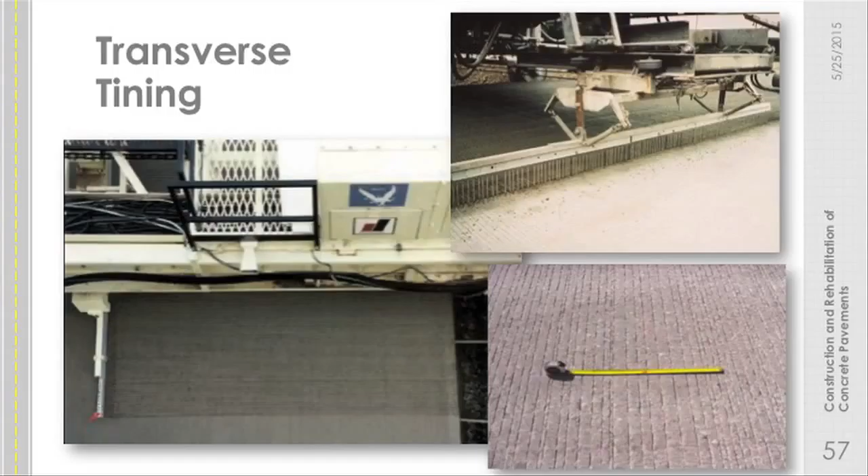Another weird thing is that when you do transverse tining, vehicles can start to lose control, especially light vehicles like motorcycles. Since the tines run in that direction, vehicles start to go sideways, and the tines promote them to spin around.

If the tining is in the direction of traffic and you start to spin, it grabs you and pulls you back forward. So it's taken us a while to get to this point. Longitudinal tines are the standard now, pretty much in the US. They also happen to be significantly quieter than transverse tines. Transverse tining is about the loudest texture you can build into a roadway, so if you're using transverse tining, consider using something else.

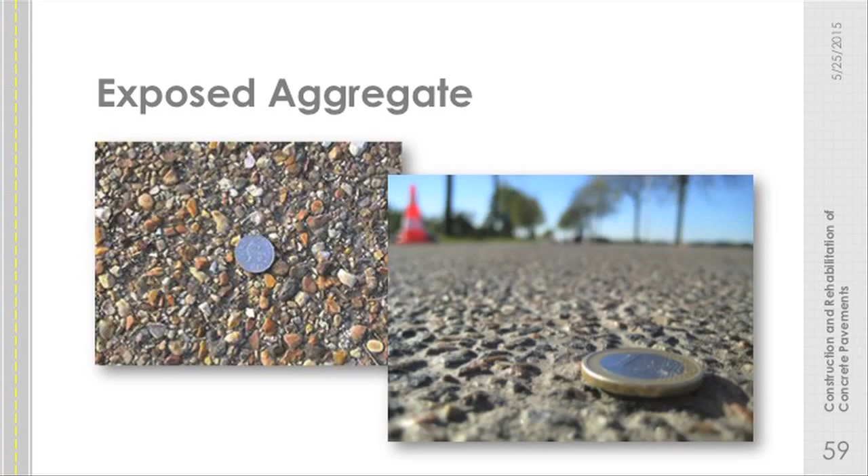Exposed aggregate, we've done this some in the US. That's a euro, that looks like a Czech crown, so these are European photos. We don't do it that much in the US. It's costly. You have to have a good handle on the aggregate gradation. As soon as they place the concrete, you have to spray the surface with a retarding agent to slow down hydration just at the surface. Then at the right time, you go back with brooms to mechanically remove that paste. If you go too late, you don't get as exposed a surface; if you go too early, you start to pull up the rocks. So it's very much an art. They do it mostly for noise reduction, though in the UK they'll do it for friction as well.

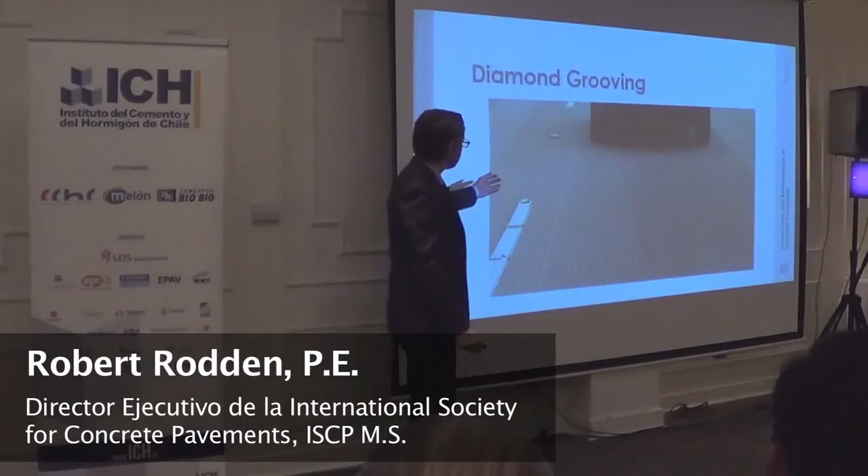So finally, onto the most aggressive surfaces we can build. Diamond grooving - we don't do anything to the surface itself, we just cut into it at regular spacing with diamond blade saws. This one's in the longitudinal direction. Concrete airfields - it's not uncommon to see diamond grooving on airfields.

Last thing, probably the most aggressive texture, is diamond grinding. We do this a lot in the US, especially on the preservation and maintenance side of things. This is comparable to refinishing a hardwood floor - we're covering up or removing the entire surface defects. So if you had a little bit of faulting from slab to slab, it would zero that out and make the pavement perfectly smooth.

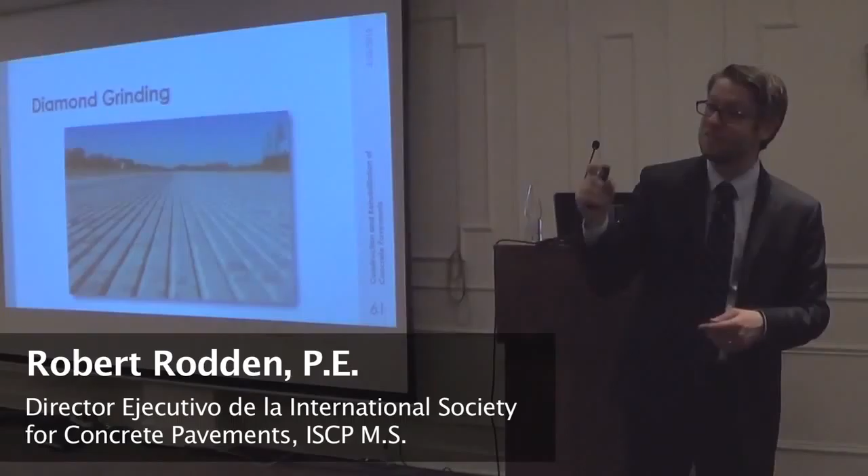Now, because we're finishing the entire surface, it's relatively costly compared to other methods, but it gives us an opportunity to extend the life of the pavement. In states like Washington and Utah, they're now taking this approach because they have a lot of studded tires in the mountains - whenever it snows and there's ice, people put on tires with little metal studs for traction, and those tires rut concrete. It doesn't matter, concrete will rut just like asphalt. So from a management perspective, if they need 20 centimeters of thickness, they'll build it a little bit thicker than that - building in sacrificial thickness to allow diamond grinding once rutting has occurred. Once they get more than 10 millimeters of rutting, they diamond grind the entire surface, having built in that extra thickness as part of the preservation plan. That little bit of additional cost up front saves them from having to reconstruct the pavement.

All right, I've got two videos of US practice.

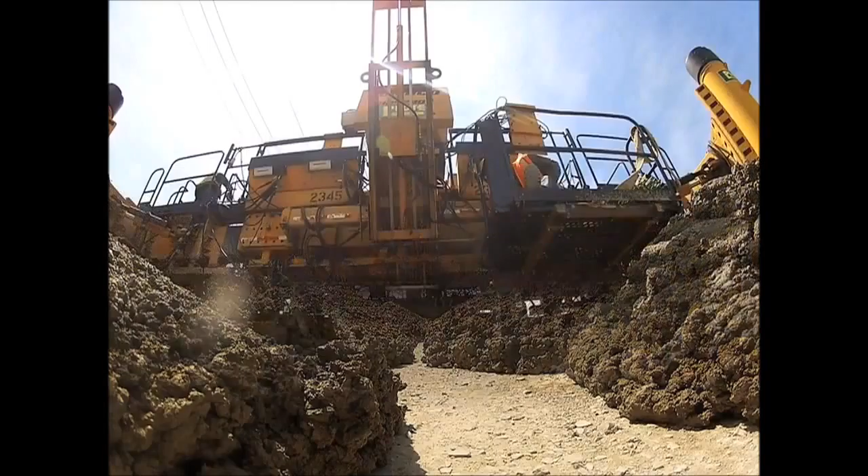That goes out behind the pan, engages the tie bar, and punches it in at the right moment. If you're close enough, and you've never been around a slip-form paver before, you can feel how this concrete, all by these vibrators alone, is just getting pulled into being flat. Right through here you don't see this rough aggregate texture at all—it's becoming temporarily fluidized inside, constantly rolling that head of liquid concrete forward.

They did this with GoPro cameras so they could lose them. Past that point, they had the texturing, curing, and other operations. You see our string line guiding the pavers, and all those pieces of equipment mentioned. Next video is a little longer with the paving action. That was Dottie Avenue in Chicago.

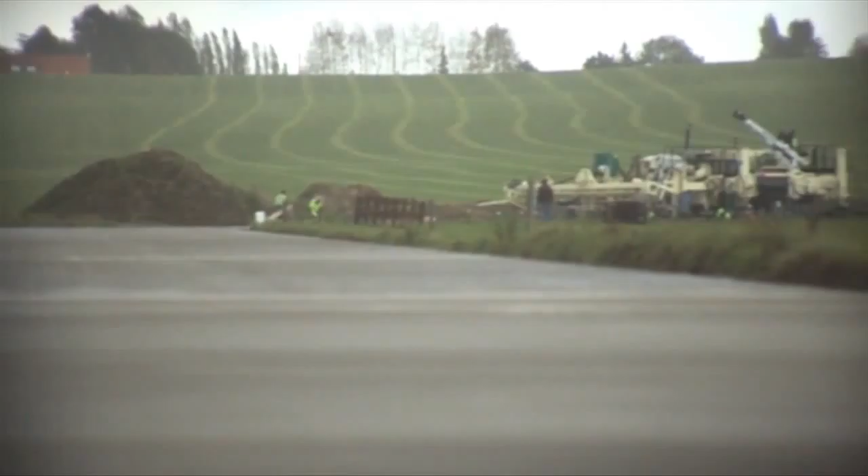This video is from Guntert and Zimmerman. Primary slip-form paving manufacturers are Guntert and Zimmerman, Gomaco, and Power Pavers, I believe—and Wirtgen as well, out of Germany. So there's four primaries. This is their mid-size paver, probably one of the more popular pieces of equipment they have. I think this one actually has a dowel bar inserter in the video.

These are just from YouTube, just grab them off of there. We've got our string line making a curve there. This piece of equipment is outfitted with a plow instead of an auger, so we'll see that in action. They're dumping it pretty close to where the plow will be, using ready-mix trucks, even though it looks like this project's pretty far in the middle of nowhere. There's one perspective of the plow.

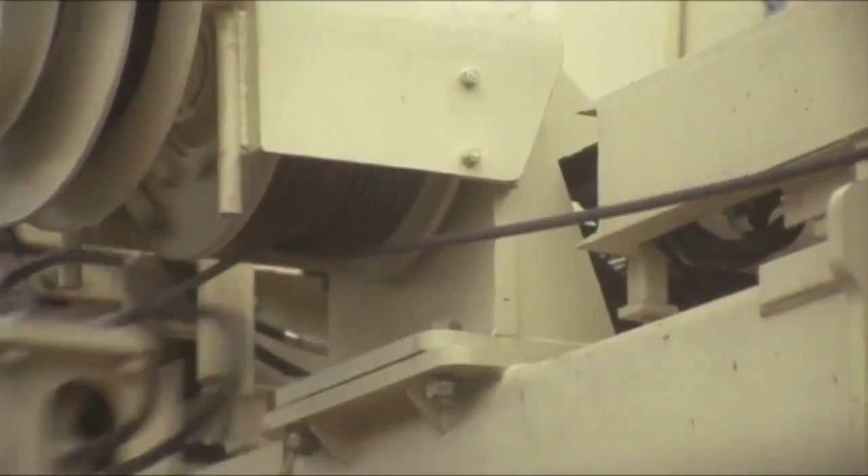Once they get moving, that'll push the concrete back and forth and into the corners. There's our operator up front telling the plow to go back and forth, checking on the supply of things. Looks like here they're just getting off the header. So even out front you can see there's a bit of a pitch to those pans. That's the drive system for the plow itself.

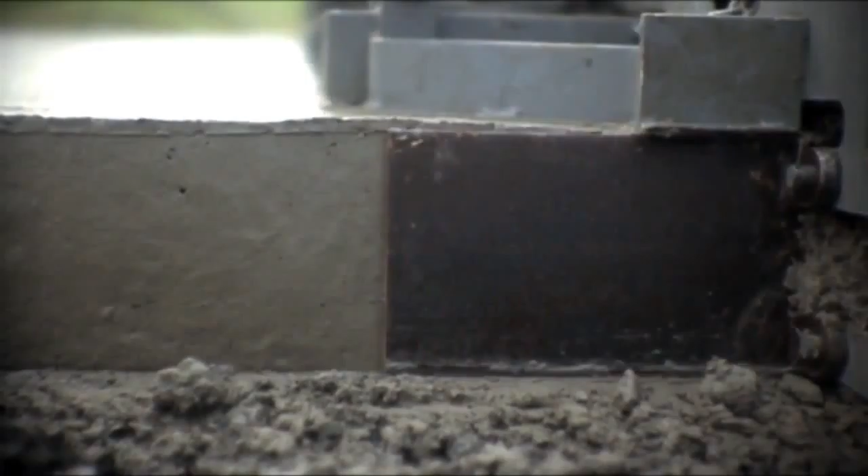So they're getting a pretty constant level of that concrete across the width. You won't see that same impact of fluidization that we saw in the last video, because things are already relatively flat. But there, inside of the side forms, the concrete is bubbling—we're losing air because we're fluidizing with the vibrators, about 2% loss of air inside of the paver. This device right there, that wheel, was timing the tie bar inserter. There you can see the edge slump happening in real time.

So imagine trying to pave up next to that. You have to match elevation, you want that thickness—lots of little moving parts. But what you don't see in the slip-forming action is a lot of labor. In places like the US, where labor is very expensive, it's more cost effective to go into some of these slip-form approaches. Now when we talk about international practices, we'll see some more photos of the impact of labor in fixed-form versus even precast concrete paving.

So we placed the concrete, it's all consolidated, all these things—now we're on to curing it. When it comes to curing, we're trying to maintain both the moisture content and the temperature of the concrete. Depending on if it's hot or cold outside, that means different things. But ultimately, the hydration reaction—cement plus water turning into concrete—needs moisture to happen. It needs that water. So if we lose a bunch of water, hydration will stop.

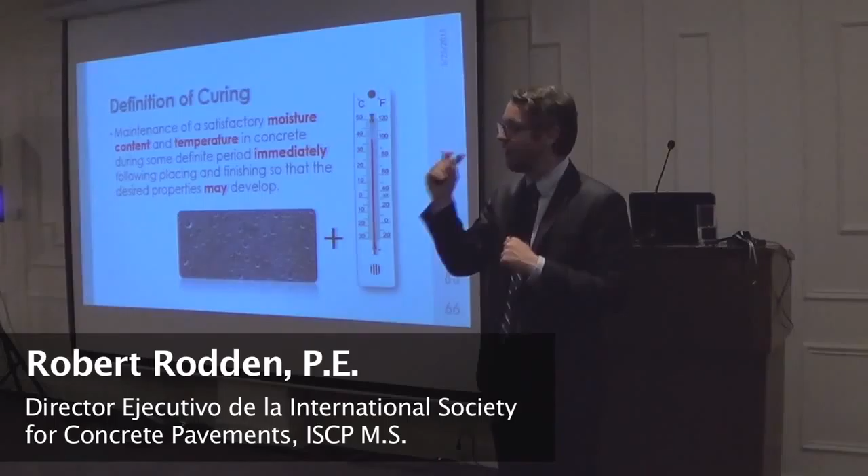If it dries out at the surface—again, the most critical spot in that thickness, that's what's exposed to traffic, that's what's exposed to any sort of salting and freeze-thaw—if it dries out at that surface, hydration will stop and we'll stop gaining strength right at the surface. So we want to make sure we either keep a constant supply of water at the surface or prevent the moisture from evaporating, which is more of what we do in pavements.

The other side is temperature. If it's cold out, we want to make sure we keep it warm enough so that the concrete hydrates as we intend. In extreme cases, if you place fresh concrete in the field and it gets very cold overnight, the water might actually freeze before the concrete sets. That free water that hasn't yet hydrated with the cement can freeze, turn into ice crystals, and your concrete strength is essentially zero. You have to remove and replace it in most instances that are that bad.

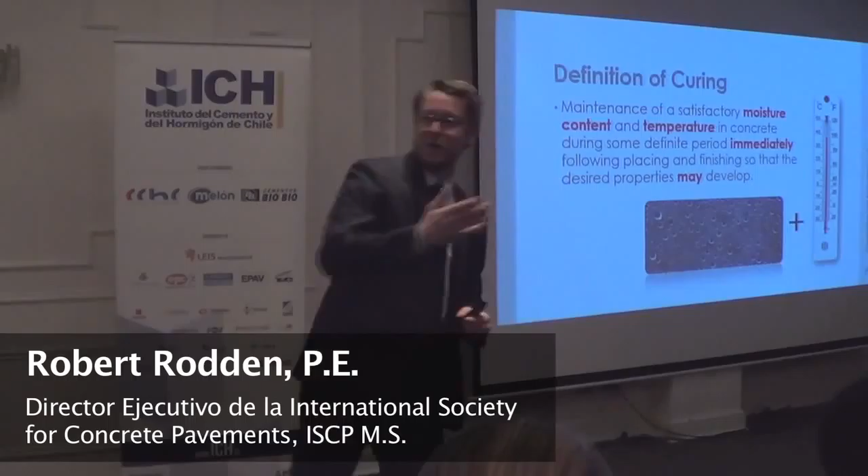Now, anywhere along that spectrum, if the heat isn't where it needs to be, the hydration reaction will slow down, so the strength gain won't be as quick as you'd like. You won't be able to open it to traffic as quick as you might like. If it gets too hot—I wish I had a dry erase board—there's problems that happen on the other end, but they're more difficult to describe without drawing. Too hot is a problem as well.

Curing objectives: we're trying to prevent or replenish the loss of moisture and maintain a favorable temperature, one that's conducive to proper strength gain. We're doing this for a predefined period of time. As a contractor, the owner can't expect me to cure this concrete slab for a year. It needs to get open to traffic, usually very quickly. So we have a certain amount of time that we're most concerned with.

What we see in these photos are the two most common curing methods in the US. The first is an application of a white pigmented curing compound from a texture cure machine, so it's a very automated method. Our Federal Highway Administration's guidance is that the surface, if you're using white pigmented materials, should be as white as a sheet of paper.

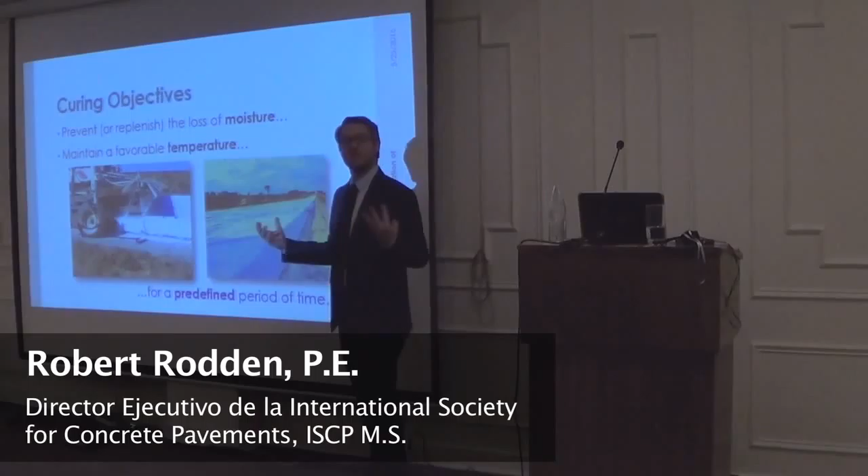Over here we have blankets, which are just like a blanket that you sleep under. It's holding in the heat of hydration to help maintain a favorable temperature. We do that if it's cold out.

So we do have different methods, that's two of them, and we break them into initial cure and final cure as well. An initial cure is something that we might do during the point before bleed water has escaped completely, before we can apply the curing compound or other methods.

Now, when we place the concrete, there is some water that will bleed to the surface. We'll get a nice sheen at the surface, which will evaporate off. Before that's completed, we cannot apply a membrane-forming curing compound. Otherwise, the bleed water will mix with it, and it just goes away.

It's not effective. So before we are at the point of bleed water happening, we can use evaporation retarders on the surface. We just spray those on the surface, or use misting or fogging. We're not adding water to the system, we're replenishing the water that's evaporating out to try to prevent plastic shrinkage cracking.

Once we get past that point, the final cure, we can use wet coverings. That might be paper or burlap that we continuously keep wet. We're trying to moist cure. We can use impervious paper to try to seal in the system, or plastic sheets for the same reason.

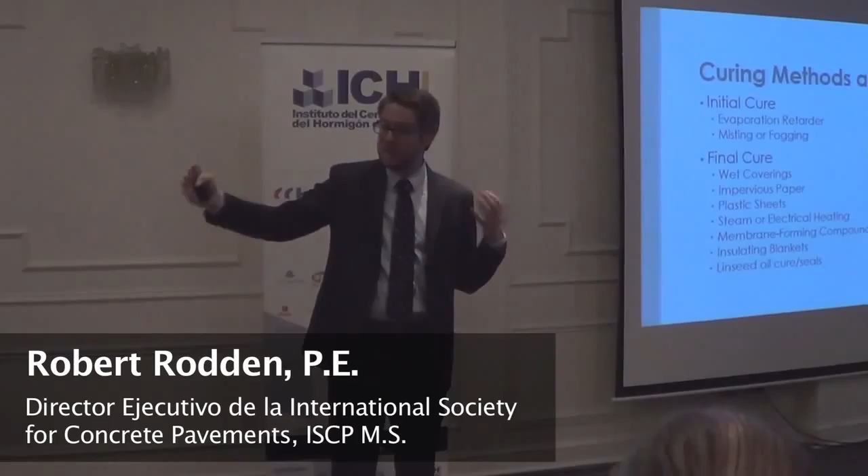We can even go so far as using steam or electrical heating, adding a bunch of heat to the system, and we'll do that in extreme climates like Minnesota and Wisconsin. We actually have massive heated blankets that we roll out onto the grade, and it heats up the soils or the subbase. We place the concrete, and we roll that same blanket right on top of the concrete to help add heat to the system. That's the only way we have enough time to build concrete pavements in such cold climates. It's by extending it with our curing.

Membrane-forming curing compounds, like this white pigmented one, just try to seal the surface. Insulating blankets and linseed oils, which are more commonly seen as sealants, fill the voids of the concrete to help resist freeze-thaw issues. Most common are the membrane forming and the blanket cures.

Is that true here as well? You're transitioning to the resin-based, correct? And less of the water-based? That's only our harshest climate state agencies are really pushing for the resin.

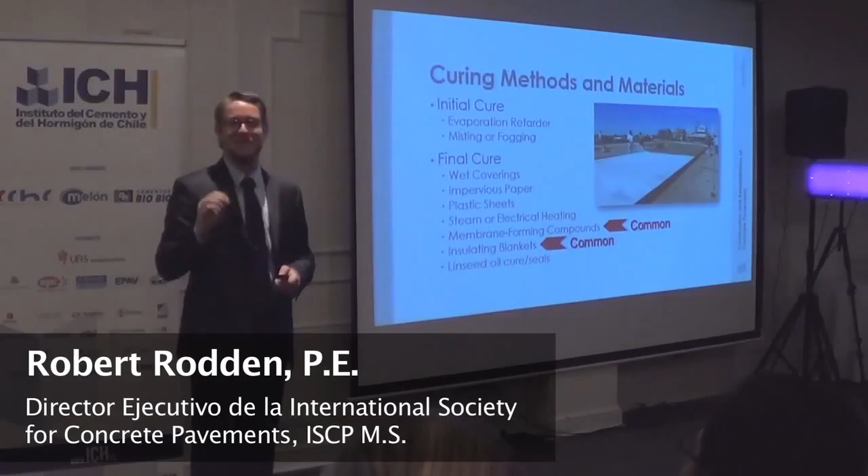In fact, Jeff Roesler has done some preliminary research at the University of Illinois, and he now suggests that if we cure too well with the resin-based, we might increase curl. Because what we do is we create too fine of a pore structure, which means for the same drying of the environment, we cause more shrinkage potential right at the surface. So where curing has been the best deal for 100 years, further sealing the system might actually have a negative consequence.

So keep an eye out for that if you see it with the resin-based here. We're watching all the resin states right now to see if there's any proof of that in the field. But that's based on research with specimens that are this big inside of a controlled lab chamber, and you can only get so close to reality with that sort of approach.

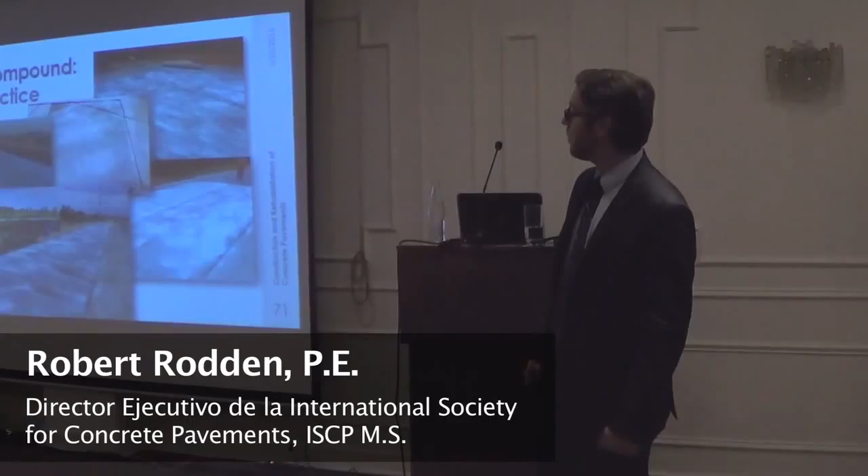This is a texture cure machine application. You can see, and this was in Texas, they just have trails from where they tried to cure. A lot of things could cause that. Maybe the equipment wasn't clean, the nozzles weren't clean. It could have been the consistency of the material at that temperature. It could have just been they didn't have the nozzles open enough.

It's hard to say, but we've had some practical research come out of Texas on the curing application side of things, because it's very difficult, based on the manufacturer's recommendations, which specify a certain area of application per a certain volume of material, to try to enforce that in the field.

So the Texas DOT first developed what they call the diaper test, where I don't know if you have these here or not, whenever you're training a puppy, a small dog, to go outside, you put these sheets out and the dog pees on those, so just absorbent sheets. We'd place those in the field, run the cure across it, and measure how much material was absorbed over that area.

So we could check the application rate. The easier thing seems to be, if you're using a texture cure machine, to validate each piece of equipment as the owner independently. That's the automated method, not a hand sprayer, but the texture cure machine, such as this.

What you can do is, on each nozzle, just hang a bucket. You can have them move forward at the rate that they would normally move forward with the nozzle spraying, and measure how much curing compound is in each bucket. Based on the amount in each bucket, look at the handle that controls the forward speed and put a mark that they can't go past, because if they go any faster than that point, the application rate will be too low. So it's a very practical, hands-on way to say, well, we're going to validate your machine, your piece of equipment.

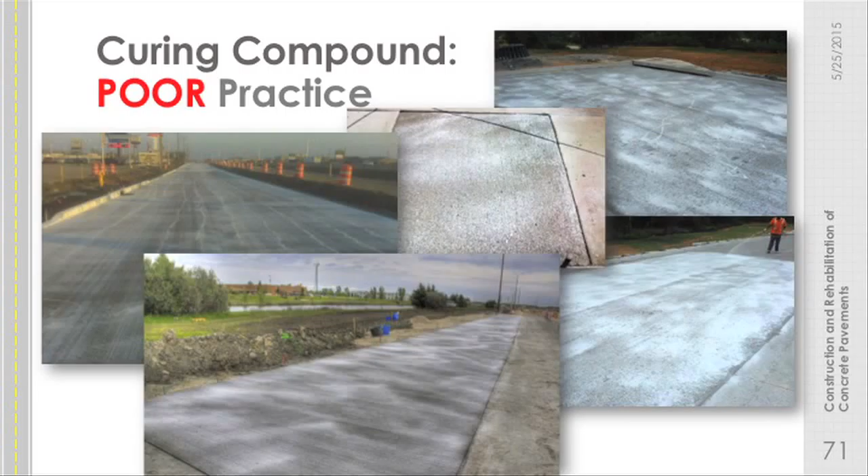The only other caveat from my time in the world of contracting is be happy that you're into the world of resin cures, because with water-based cure, it was very common for contractors to just add a little bit of water into the barrel of curing compound to help extend how much is left, because it would just mix in. You can't do that with resin-based materials, so there's no way to cheat the system.

Blanket insulation, we place this after we've sealed the surface with a membrane-forming curing compound. It reduces the loss of heat of hydration. It also lessens some of the other effects, like the air temperature and any sort of evaporative cooling that would happen from wind and solar radiation, so the sun's heat.

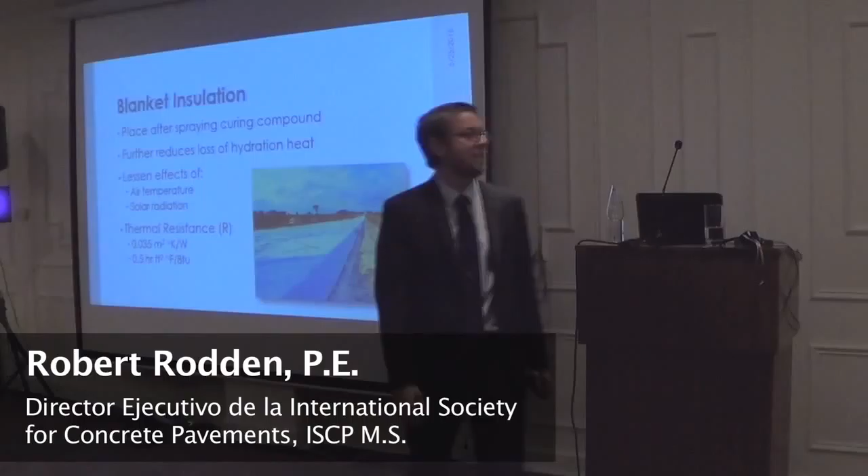So we might actually insulate sometimes if the sun is too hot. Typical thermal resistance, R values, are down there.

Now, when do we use these? A simple table based on the ambient air temperature and the opening time to traffic tells us when we might consider using blanket curing. So more often than not, it's for early opening to traffic than anything else. We're trying to get the hydration to happen in the window of time that we're most looking for.

Now, of course, you can change the cement content. You can change other factors to promote higher release strength. This is just one consideration.

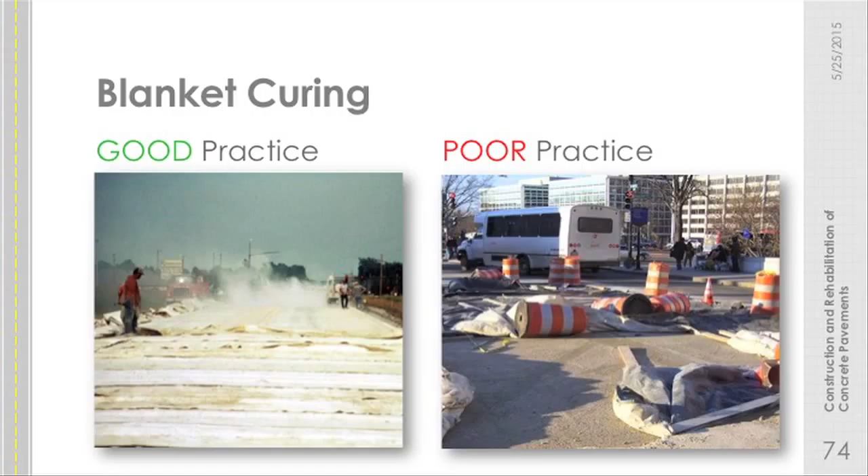Good practice here on the left. They were blanket curing long enough to peel them back in time to saw cut the joints. This photo on the right, I took in Washington, D.C. in January of all times, which is one of the worst times in Washington, D.C. to be constructing concrete pavements. They were rebuilding an intersection a quadrant at a time. I watched them place the first two. They worked okay. In this particular case, the curing just came off almost immediately.

Jointing. So we've built the concrete, textured it, cured it. It's time to saw cut the joints where we want them. If we have embedded steel, we've somehow communicated to the saw cutting crews where to place the saw cuts. Here, that gentleman is dragging a piece of chain or rope across the surface, doing that at a regular spacing to help indicate where to saw.

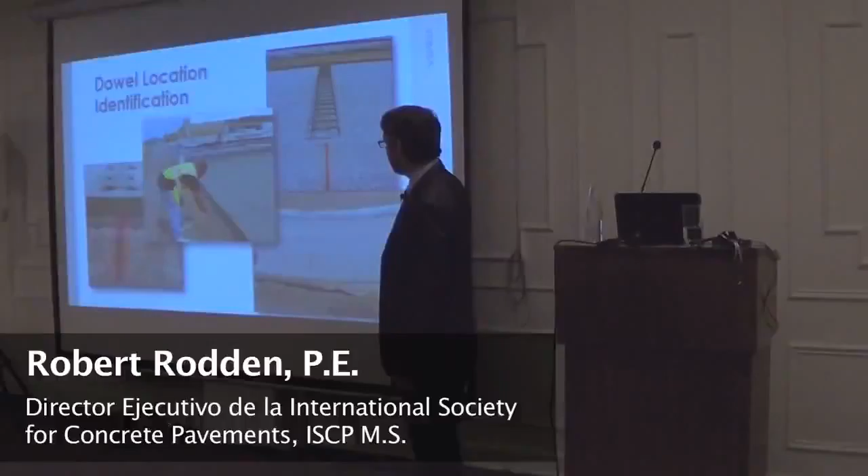We do sometimes see formed joints like we see in the top right here. It's not too common anymore, more common in developing countries it seems. The problem is whenever you have a perfectly flat piece of concrete and you somehow induce a void, the material has to go somewhere. It's just like inserting the tie bar into the side and making a hump. You push down and create a void, you end up with a little tiny hump on either side, which makes roughness. So it's much better to wait till the concrete sets and then saw negatively down into it.

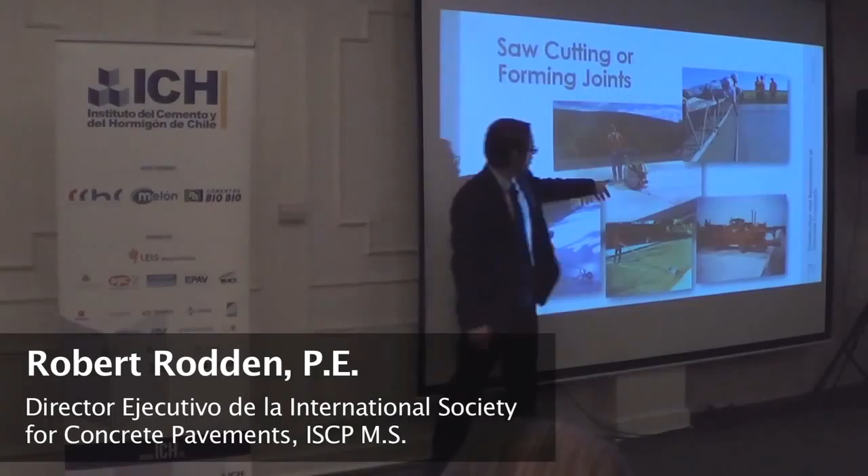Sometimes we have massive devices like this that follow the paving, right on top of the pavement, called a span saw. We'll do the entire width of the pavement all in one pass in a very automated fashion. Otherwise, more common, we'll see early entry saws, whether dry or wet. There's a soft cut saw, or a conventional wet cut which is quite a bit larger, and we saw cut those much later than the early entry saws. I see we have a distributor of some of these technologies over there.

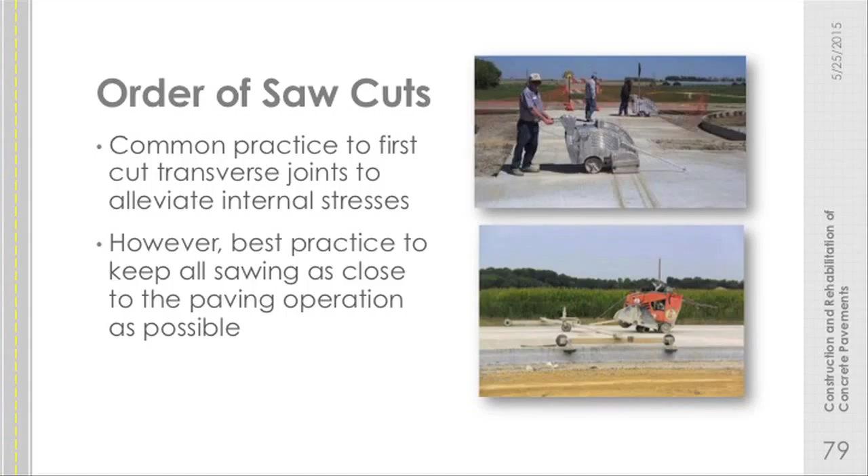Order of saw cutting: cut the transverse joints first. When we build this very long, continuous stretch of roadway, it's most restrained in that direction. It can kind of shrink and contract across its width relative to its length, so we need to prevent cracking in the long direction first. So we saw cut across the width first, the transverse cuts. It's best though to keep the saw cutting operations as close as possible to each other, so that's the transverse and the longitudinal.

When it comes to high volume road production, it's very common to see a jig like this. It just references the outside edges of the pavement. It has casters or rollers, and even as we move into turns or anything else, it maintains that saw right at the middle of that width. We can gang mount those, so we can mount two, three, four saws on one of these types of jigs. We'll see that when we talk about overlays.

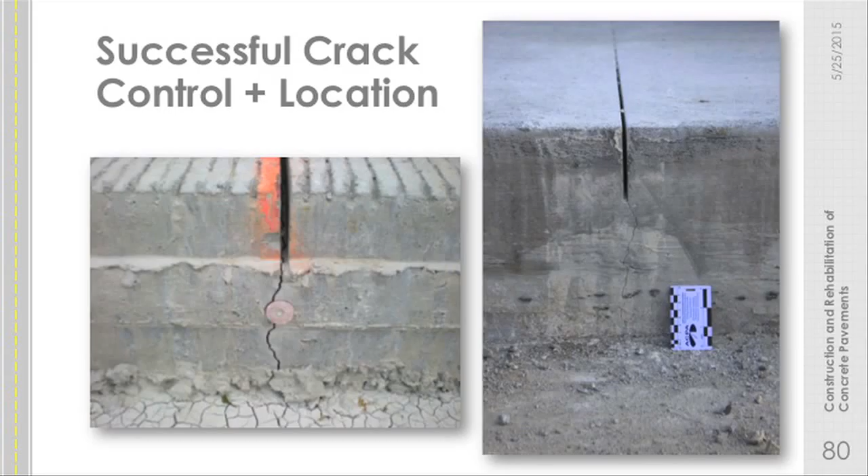If everything went well, here they have a point where they've indicated this is where I want you to saw cut, this is where I place the dowel bar. We can see our transverse tine. They've saw cut down to the required depth, and the joint is activated. That's what we're looking for. The joint on the right's a little bit finer of a crack, but it's there.

Now, the depth of the saw cut is as important as its timing. If we cut too shallow, we might not create a weak enough plane, so the concrete might not be able to crack at that point. If we cut too deep, we end up getting rid of the aggregate interlock, and that's especially important if you're not relying on dowel bars. So you don't want to go too shallow or too deep. If you go too deep, you also wear out the equipment a lot faster.

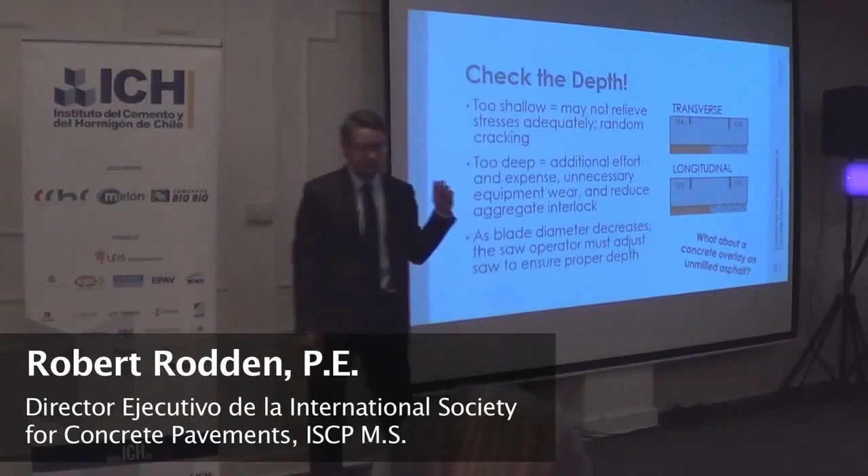Part of the challenge is, especially with the abrasive saw blades instead of the diamond-tipped ones, as you saw more and more, the diameter of the blade will start to decrease. If you've ever used a Dremel, a handheld Dremel with the cutoff blade, same thing happens with these. So the diameter decreases, so they have to cut just a little bit deeper to get the same depth of saw cut. And that's part of the art of the saw cut operator to handle all of that.

Transverse joints, if you're building on an unstabilized material, you usually cut to one quarter of the depth. Longitudinal joints, if you're building on an unstabilized material, usually cut to one third of the depth.

If you're building on stabilized materials, so a lean concrete or cement-treated base, you'd cut both to 1/3 of the depth. There's more friction, more restraint, and just to make sure we create that weakened plane, we cut a little bit deeper.

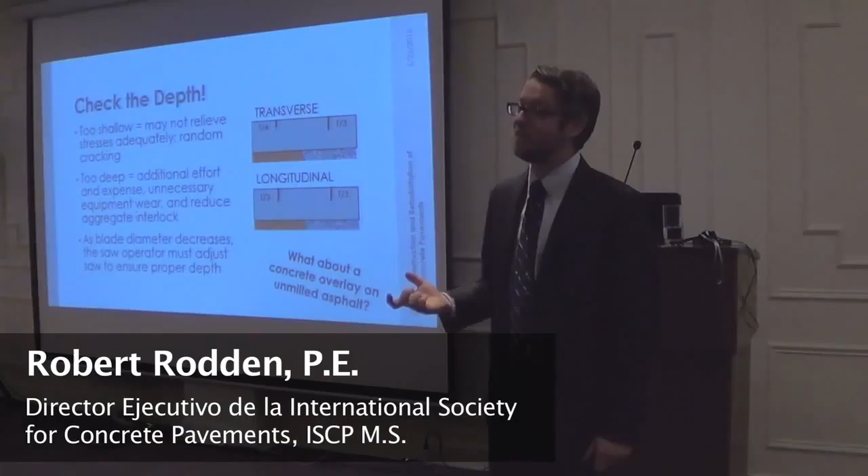The challenge is that we're looking for, say, a minimum of 15 centimeters of thickness, so that's the minimum. Where we have the rut, if the rut's an extra 25 millimeters, well, then the slab is 175 millimeters at that point, which means to maintain the same saw cut depth, we have to actually cut a little bit deeper. We do that with our overlay operations.

The saw cut operators will dip the blade down just a little bit deeper right where the ruts are. That's all part of the understanding of the contractor on the detailings of that particular construction and the inspectors to make sure that it happens. But we do that and it does work.

Yes, I have a question. Do we have the handheld mic? Does that one work? I got to turn it up. As we're getting the mic, or do you want to ask it in English and I can repeat it?

You're talking about depth, depend on early entry or not? Oh yes, I don't know if I have a slide on that or not. So he's asking if the saw cut depth is in any way related to the use of early entry sawing or not. Short answer is yes. Should have just asked you since I know you speak English. We'll get to that in the next slide.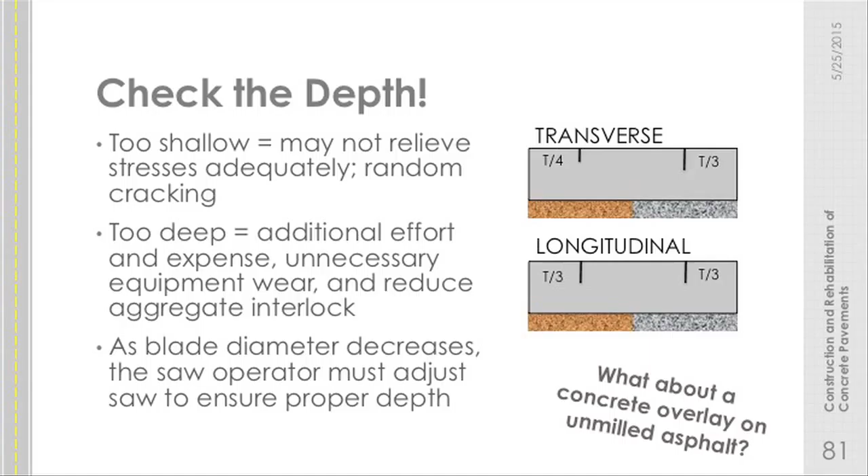So there is a minimum saw cutting depth. The short response is that the mechanics change when you're cutting so early into the life of the pavement. So it's not as simple as this is what we know works from 100 years of experience, and we introduce a new technology that cuts at a different time. We can actually saw cut a little bit more shallow because we're so early in the life of the pavement that the mechanics are different with crack initiation and propagation.

¿Y cuánto menos el espesor? How much less is the cut? Early entry saws, well, I guess I don't have that. Generally we're talking metric. That's the third thing that the US school system does not teach very well is metric units.

It's about 30, 35 millimeters minimum. Does that sound about right? For early entry, 25 minimum? Yes, yeah, I know that. But it's about 1.25 inches, 1.5 inches typically that we're at for, depends on the specification, for the minimum. So 33 minimum, does that sound about right? I guess we have the manufacturers over here, we could ask them during the break. But yes, there is a difference.

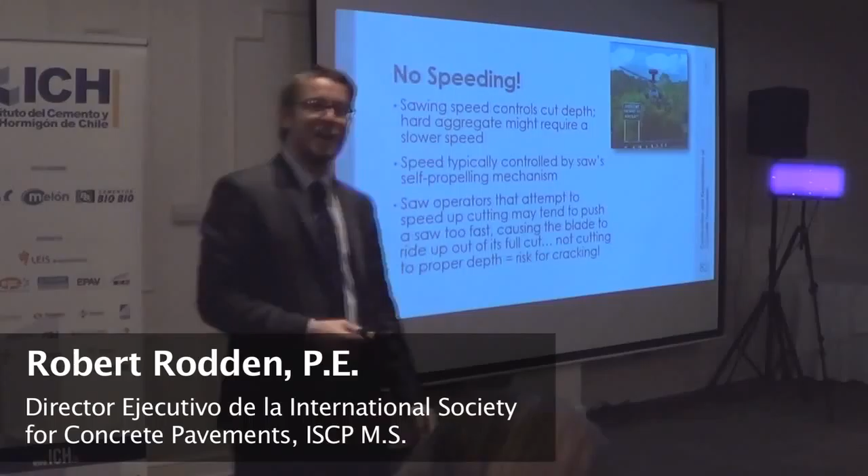So whenever we're sawing, we also can't go too quick. If we have a harder aggregate, it might take slower speed for the sawing operation to be effective in essentially allowing the saw blade to rest deep enough into the cut. If we push that, and there's usually a self-propelling mechanism inside these large saws, if we push past that, what we're going to do is push the saw blade up because it's constantly cutting this curve, and it'll start to rise the cut up into that, which means it won't cut as deep.

So we have to constantly match the sawing blade and speed and all these things together. If we don't cut deep enough, there's a risk for cracking. Starting and stopping requires particular attention.

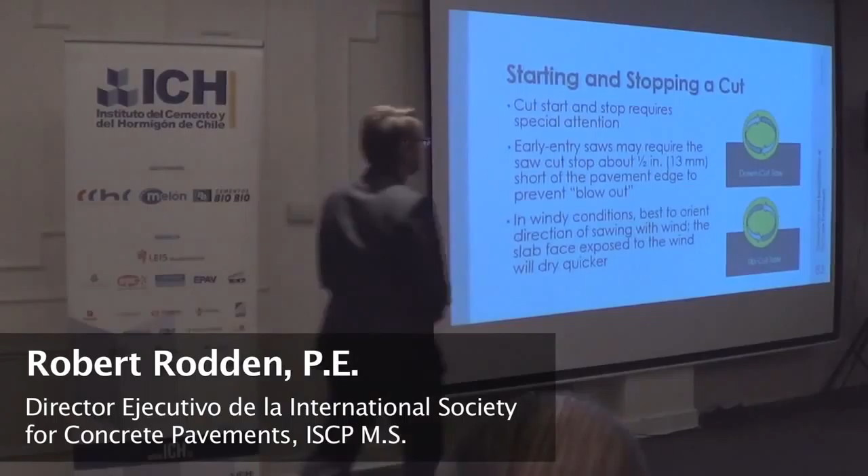Now this is on the early entry, the other detail that I wanted to get to. A conventional saw is what we call a downcut saw, so a wet cut saw cuts in this clockwise rotation. This is another one of those seemingly unimportant details in design and construction that matters. Now when this is cutting this direction, and it comes to this free edge, what happens is we're cutting into the slab, so it's always a supported cut.

The early entry saws cut the other direction, counterclockwise. So whenever they come to this free edge, they work to push or blow out that free edge because there's no sort of support. Once it gets to the point of cutting right here, this little tiny wedge wants to just push out. So you can end up with blowout of the edges, and this is particularly of interest at intersections of cuts. So if we already cut this direction, they manufacture plastic inserts I would put into that first cut before I cut the other direction to help provide some support or constraint.

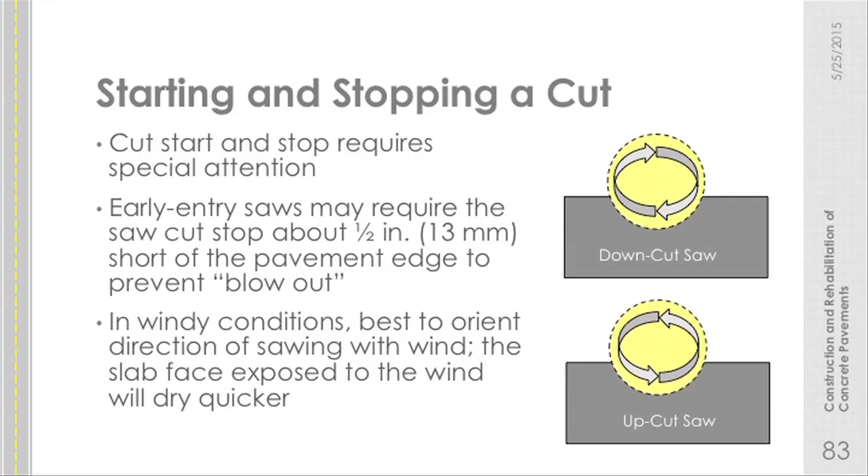Otherwise, we stop the cut about 13 millimeters from the edge of the pavement to prevent this sort of blowout. Now, if it's windy out, it's best to cut with your back to the wind. Again, this is all a big system at work.

The concrete, like a sponge, wants to dry out if there's wind, with evaporative cooling and a loss of moisture from the surface as the wind passes over it. So if you have a strip of concrete, say this is our concrete road, and the wind is blowing this way, it's going to dry out this side. This side wants to shrink, whereas this side is not as dried out.

Now, if I were to cut from right to left, I'd get to a point where the concrete just cracks while I'm cutting, because there's so much restraint, so much shrinkage wanting to happen on that one side. Now, if I would have started my cut on the side that has shrunk and cut the other direction, I don't have that same effect. It's another minor thing. Contractors are always watching out for this stuff because it happens once or twice, you lose a little money, and you learn to watch for those things.

We have to make certain that the saw cut we've made is clean if we're going to seal it. It's more and more common to see unsealed joints. There's less evidence that it makes a difference than conventional wisdom would have you think.

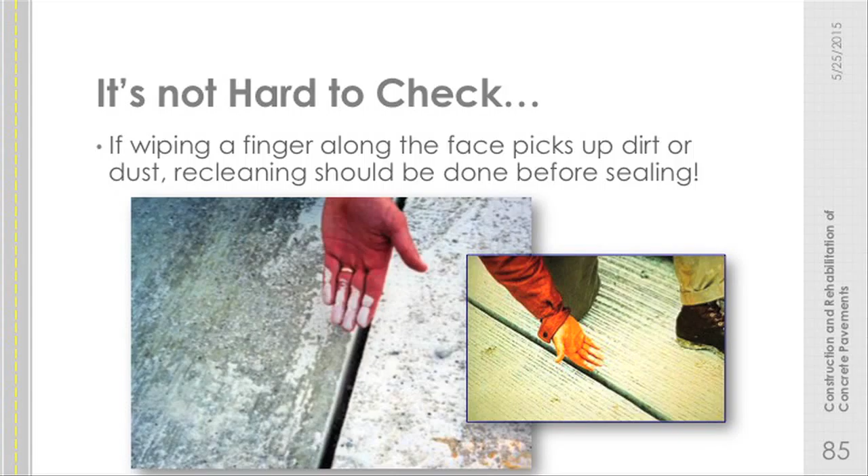A simple wipe of your fingers down into the saw cut can give you a visual indication of concerns. In fact, we now have a simple field testing kit developed inside the US. I don't think I have photos of that here, but we're taking tongue depressors. It's very, very simple. A tongue depressor, like what the doctor would use to push down on your tongue, just a wooden stick, with a piece of black cotton t-shirt around it. Stick it down, wipe it around, and you can see where you can't see with your eyes.

And also, for the sake of adhesion, we're using electrical tape, 3M brand. Same thing, tongue depressor down, and we push it against the faces of the concrete saw cut itself. Then we clamp on a fish scale, little lightweight scales you would bring fishing to see how much the fish would weigh, and we pull that out and measure the maximum load before it gave. That tells us whether it's good enough that we can adhere a sealant to it.

So these are just simple field tests developed in the last couple years to check this, because if you're going to seal the joints, you have to make sure they're clean enough. Otherwise, the entire point of the sealing is pointless. You shouldn't even be sealing if you're not going to make sure it's clean enough to seal too. They will not perform as you expect without proper preparation.

To drive that point home, from an owner's perspective, it costs the contractor nothing more to check this and do it correctly. What you see here is the relative cost, basically the percent of total cost of each of the sawing operations. We have silicone sealants, hot pour sealant, which is an asphaltic material, and a compression sealant.

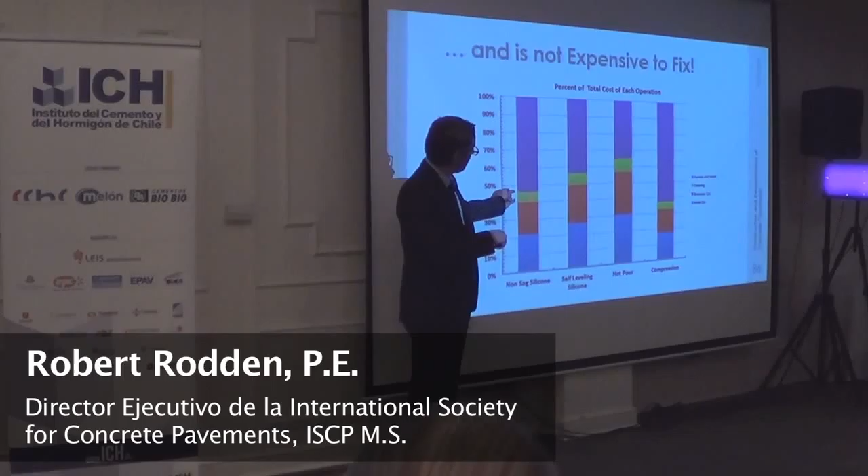Now the blue bars are our initial saw cut. The red bars are the reservoir saw cut, making it wider to get the proper aspect ratio—we'll touch on that in a bit. The green bars, the smallest, are the cleaning. And the purple is furnishing and installing the sealant. Cleaning is such a small part that, to have to do it twice, from an owner's or inspector's perspective, just make them do it twice to make the sealant actually last.

So we first make that crack control cut. That's the deepest one. We come in, we widen that. We clean the entire faces and make sure that it's clean.

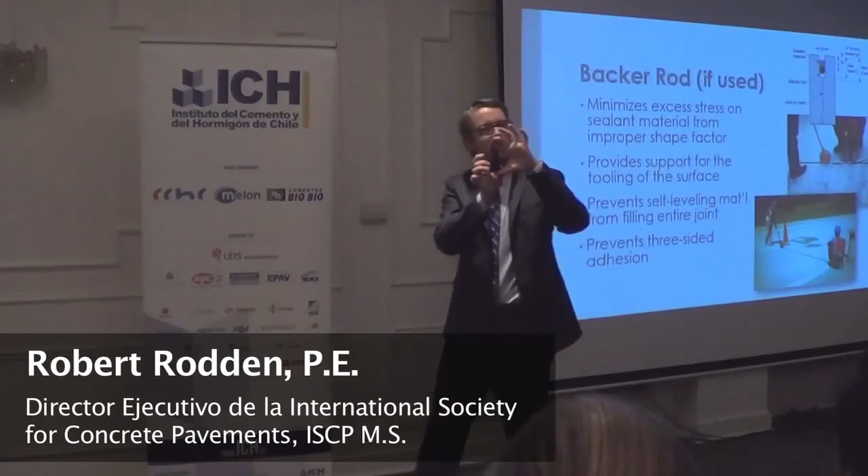So if we have a sealant that's very wide and narrow like this, and we pull on the two ends, it's probably going to want to tear in the middle. Now if we turn the sealant the other way, it's very deep but narrow, and we pull on it, it's not going to tear in the middle, but it'll probably rip away from the faces of the joint. That's why we have this specific width and depth. We're balancing that because of the mechanics of a sealant. We don't want it to break away from the sidewalls, and we don't want it to rip apart itself. So the manufacturers provide the guidance to the designers on how to design that specific detail.

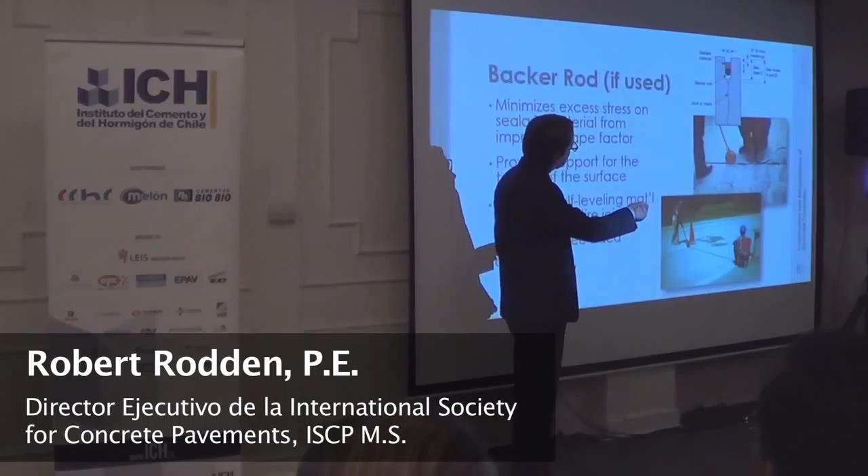It's just getting translated into the field. If we're using a flowable material, this backer rod also allows us to push against something. So if we push on the sealant, the backer rod pushes back. And it prevents three-sided adhesion, so that our sealant is really only sealing between the two sidewalls. That's what it's designed to do. It's not designed to seal on three sides.

And we seal the joints following the manufacturer's recommendations on the minimum installation temperature. Again, we make sure everything's clean and dry before we seal. We fill the sealant from the bottom up. If you try to seal from the top down, it can entrap little air bubbles. From the contractor's perspective, that's good, it uses less sealant, but it's not actually sealing much if there's a lot of trapped air.

And this should be as smooth and continuous as possible. The particular installers, the people who use these sort of pieces of equipment, have a very good eye for this, and they work at a very constant rate. It's impressive to see.

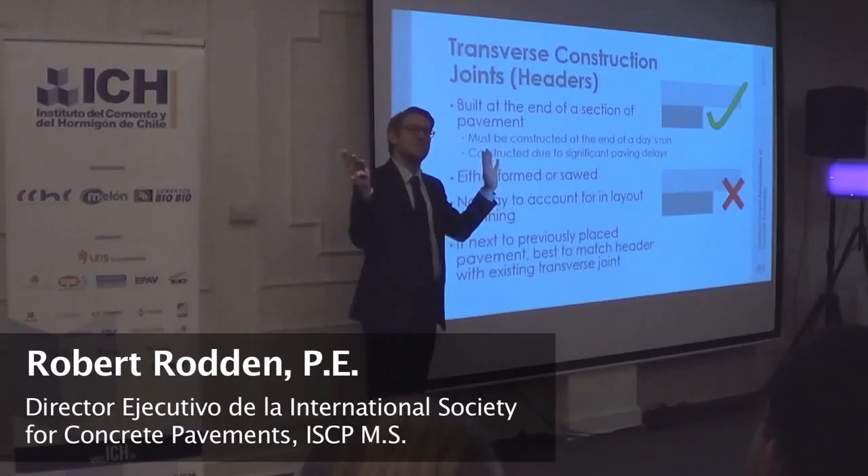Transverse construction joints. So we'll build the pavement, that's a normal day's work. But now we're at a point where we have to stop paving. This is a break in the operation, whether it's from the end of the day's paving or some sort of material disruption. We couldn't get concrete because there's a traffic jam or something on the way, and we have to stop paving, or even because it's raining outside. We just have to quit.

We can either form these if we know that they're coming, so we create a formed system, or we can saw them. In either case, there's no way to account for these in the layout. You can't, as a designer, tell the contractor we're going to have transverse construction joints in these 5 spots and nowhere else. It's next to impossible. So this is part of why the contractor needs the ability to adjust things in the field.

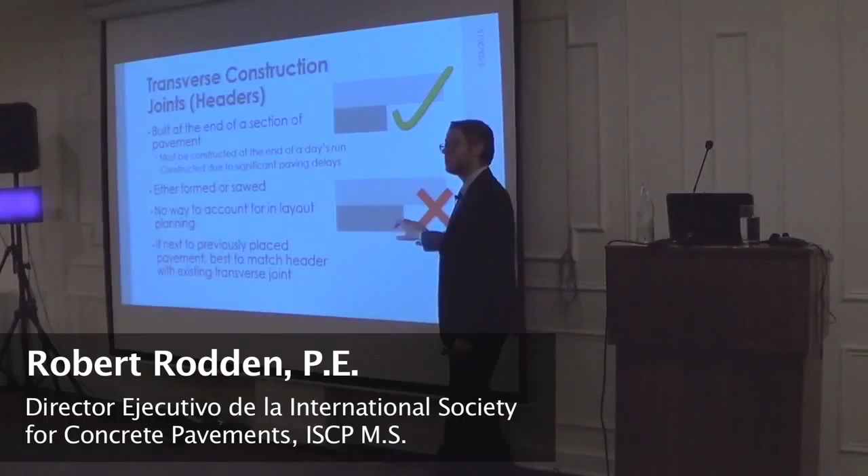And it's best to match transverse joints in the adjacent placement if you're paving next to existing concrete. So if we have a lane that we've already placed, we're going to want to put our transverse joint right there where it matches the existing pavement. If we do what we see on the bottom, we're going to have to saw cut a joint in that existing, or adjacent to that existing slab, tie bar into that, and saw cut another joint there. And it just creates one panel that's weaker than the rest. It's all about uniformity. So in this case, you might pave to there if you're sawing back, but you wouldn't pave to there thinking that's the best place to stop.

This is what a formed header looks like. This can be a 2-part form with dowels or tie bars protruding through. So what we see here is stakes vertically, with one piece of lumber at the exact same height, both of which have semicircle notches to help support and align the dowels. And then there's the exact same thing flipped upside down with the semicircle notch there, all temporarily held into place.

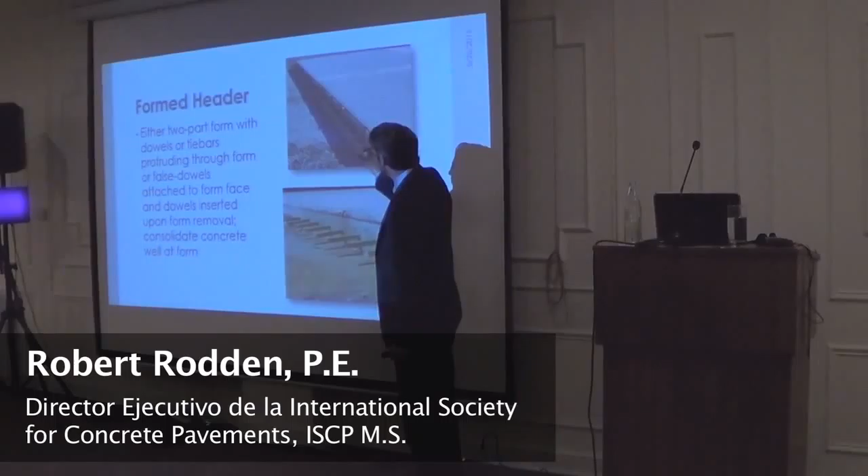We could also do this through what's called a false form. We see this more in industrial concrete paving, where we have essentially a pocket or a sleeve. So we could have the piece of lumber here, but instead of having an actual dowel bar there, we could have a pocket nailed to that. So we could remove that form and then just have a hole to stick the dowel bar into. There's a couple different approaches that have been developed.

But if we're building them like this, we have to make sure we get good consolidation into those corners. Because the problem is, especially if you're slip-form paving, the concrete paver will have to lift out before it gets to the end, so the vibrators aren't going to touch this concrete. This has to be manually vibrated or consolidated.

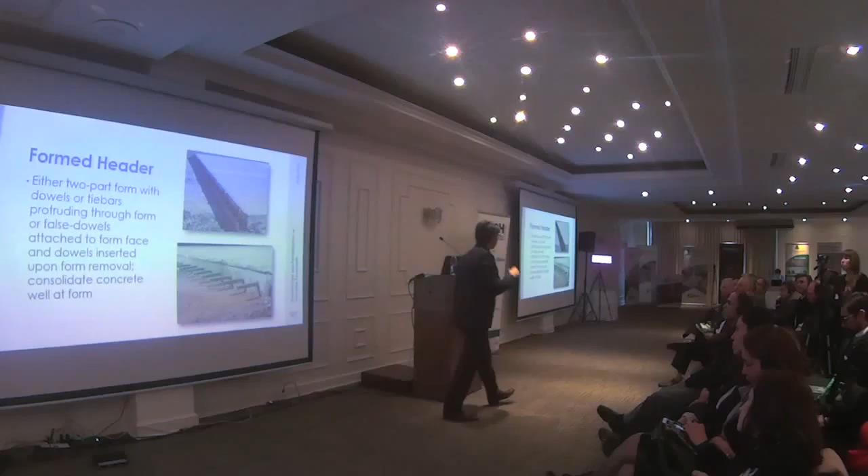Here's the formed header that I got to see them build in Indiana because the rainstorm was approaching, and it was decided that this was the route to take that day. I think in this case they were about 2 hours into the paving.

The position that I had with ACPA, these were the days that I learned the most. If you go out in the field as an engineer and everything's going well, it's cool to see, but you don't learn that much. When the day goes terrible for the contractor, that's whenever you, as the engineer, learn how to actually solve the problems. So we have another question.

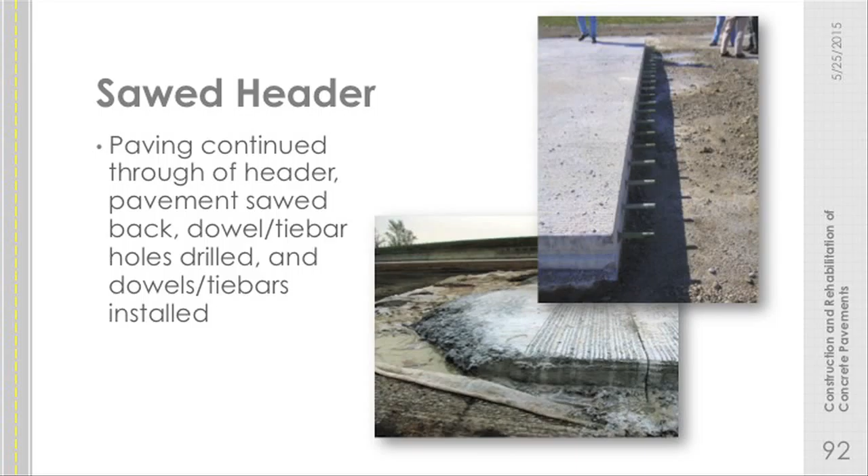The last option for a header is a sawed header. In the bottom photo, we see they just paved through, continued paving. They knew they were going to saw back. This is bonded on asphalt—you can see the asphalt pavement down there. So they paved until they ran out of concrete, then did a full depth saw cut some space back.

And we drill in and epoxy dowel bars into the backs of those holes. So that's another case like the sealant, where we drill the hole, and the grout or epoxy we're installing the dowel bars with has to start that injection at the back of the hole. If you just put it somewhere around right at the front and stick a dowel bar in, there's air entrapped there, which will just make the epoxy shoot out the front without it actually getting to the back, because you create a sealed system.

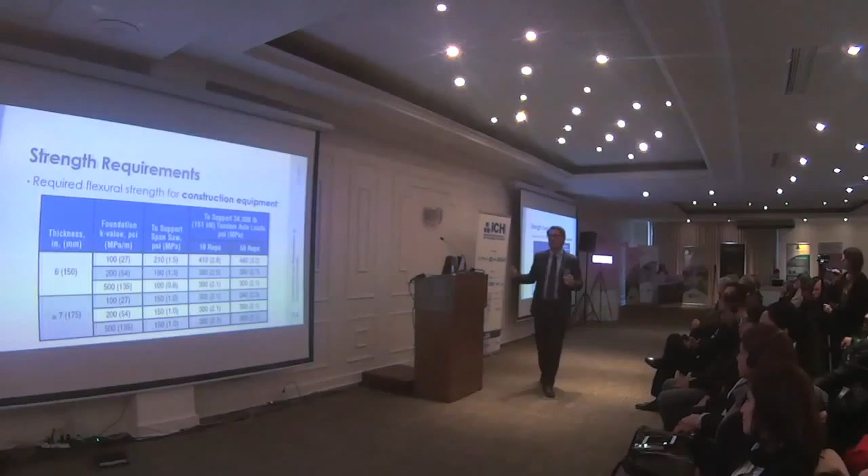So here we see the required flexural strength for construction equipment. If we have thin slabs, we have different values than if we have thick slabs. Depending on the foundation support K value, it's not a design day, so we don't get into this too much, but the stiffer the support, it makes a difference. To support a span saw, if we have a stiffer support, we can get away with a lower flexural strength. And then here's to support a 151 kilonewton tandem axle load.

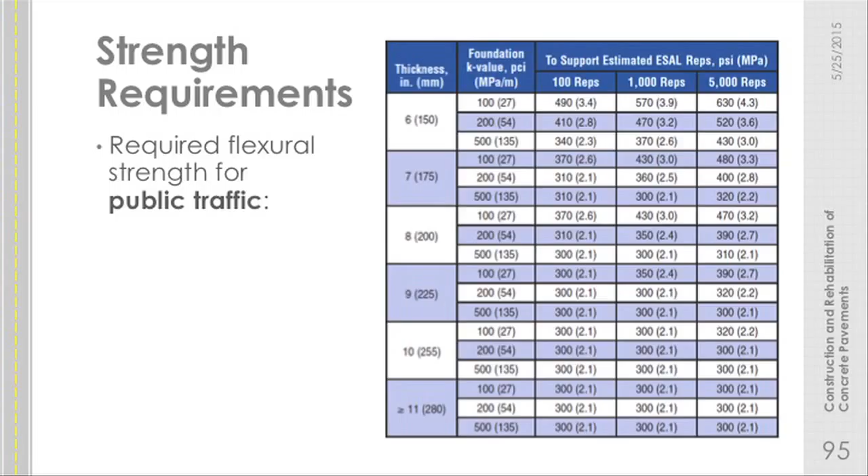So that's probably something like a water truck. 10 repetitions or 50 repetitions to cause zero fatigue damage. Same thing for public traffic. It depends on the number of repetitions, the thickness of the pavement, and how stiff the support is. But we don't see particularly high loads or high strengths here. We're talking about half the typical 28-day strength in most instances, not particularly high. So just know these tables exist, reference them if you get into a case where you're trying to specify a minimum flexural strength.

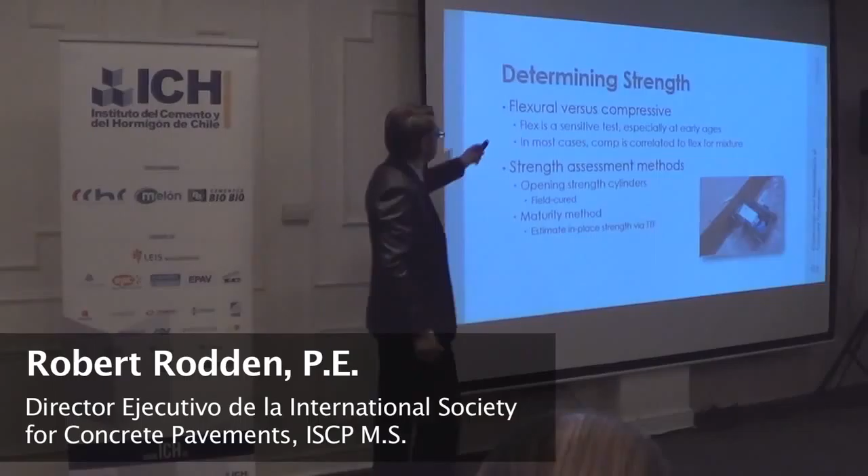And again, if you need to convert those to compressive strength, there are readily available equations out there. So to determine the strength, we can use the flexural or compressive. Flexural strength is a lot more sensitive of a test, especially at early ages. It's difficult to conduct in just a couple of hours, and sometimes we're talking about opening traffic in 4 to 6 hours. To try to get a flexural test to the testing site, with the molds removed and everything, in that amount of time is very difficult. Those are fragile specimens. So in most cases, we'll use compressive strength, or we'll use the maturity method.

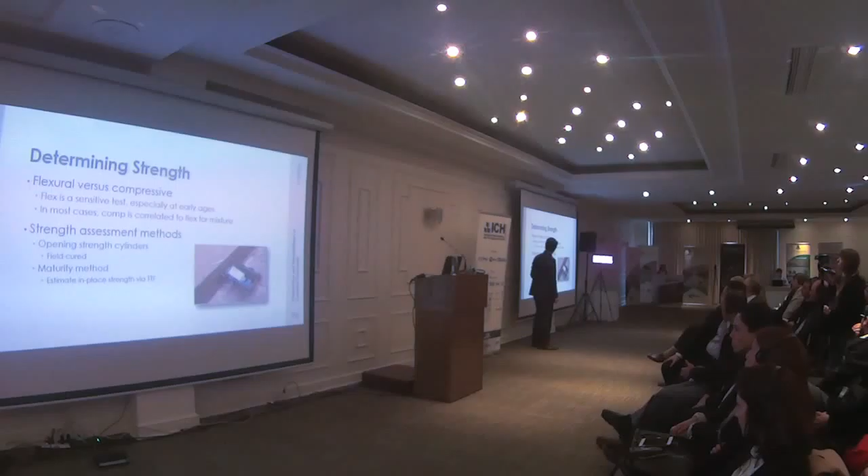If we're using compressive specimens, we do need to field cure them, because what we're trying to assess is the strength of the concrete in place. If we construct it overnight, and we intend to open traffic in the middle of the next day, and somehow the day ends up being colder than we expect it, the concrete won't hydrate as we expect it. So to take a specimen from the time of construction into a cure chamber and break it is not at all representative of the actual field curing. So we need to make sure the specimens are cured right alongside the pavement. Otherwise, we can use the maturity method.

If the opening strength cannot be met with conventional mixtures, we can use high early strength concrete. Here we're changing to type 3 or HE, high early strength cement, adding more cement content to the mixture, 400 to 500 kilograms per cube, changing to a lower water to cement ratio as low as 0.37. I'd say we go even lower now with the types of admixtures we can use to get there, 0.35 or lower sometimes. Use a higher concrete mixing temperature with heated water or aggregate, actually introducing heat into the system before we place it to help encourage hydration. We can use accelerating admixtures, insulating blankets, any approach you want to get it open in the amount of time that you're looking for.

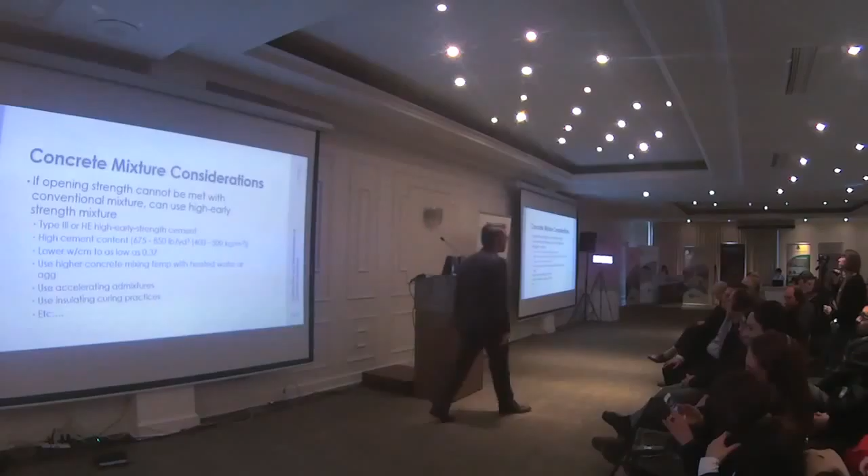But it's not at all uncommon now to see high early strength concrete mixtures. It's important to note, though, that because of the measures taken, these mixtures tend to cost more than a conventional paving mixture. So if you're paving a big area or even an intersection, that last little critical bit is what needs this mixture. If you're paving overnight, you're going to place a lot of concrete, and the stuff you first place in the evening will probably have enough strength versus the stuff you place in that very last window of time before opening. So when it comes to optimization and minimizing cost, considering these more expensive mixtures only when necessary will lead to the lowest cost to the owner.

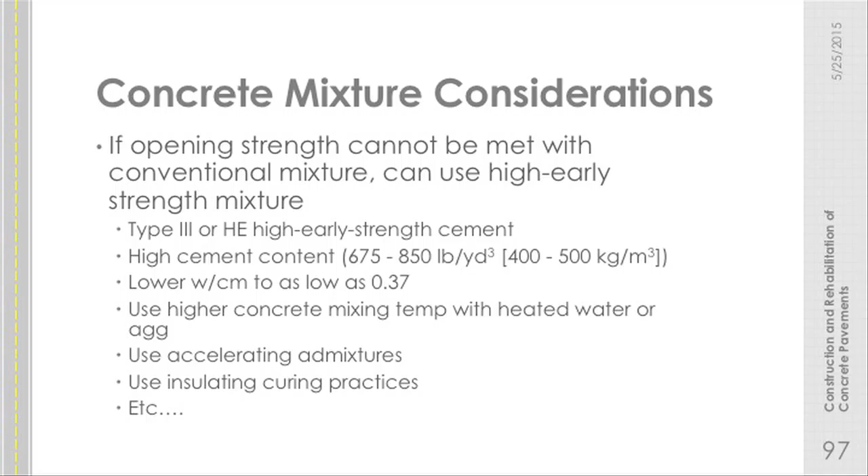Any questions to that point? Yes? It's very common. I can, well.

It is very common to use admixtures like accelerating admixtures. Yes, in pre-mixed concrete. No, that's because if anything, we're trying to extend the work window as much as possible. Yes, only for these high early strength cases. We'll use it for, say, dowel bar retrofits, which we'll talk about. So whenever we're reinstalling load transfer devices across joints, we'll use it then because we want it to open to traffic quickly, or for repair patches. In those cases, yes, we have a very short pot life though, because we're mixing it in the field, dumping it, and covering up and texturing it as quick as possible.

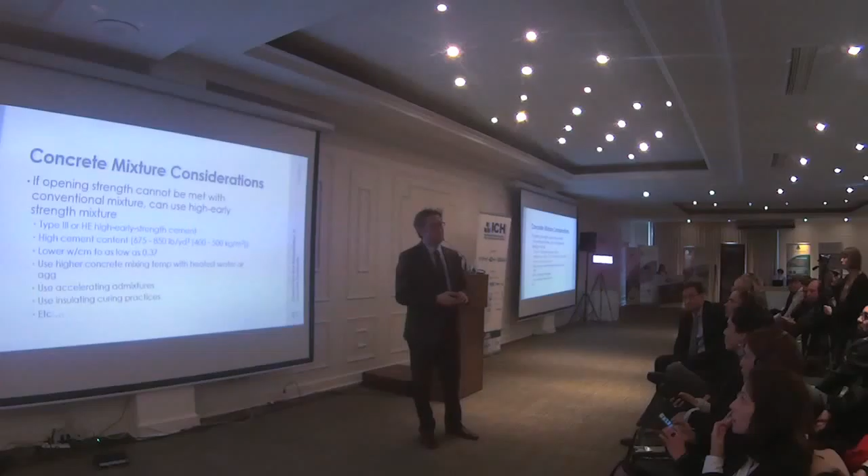For a typical pavement, you have to transport the material. There has to be time to place it. No, it's not common at all to see them.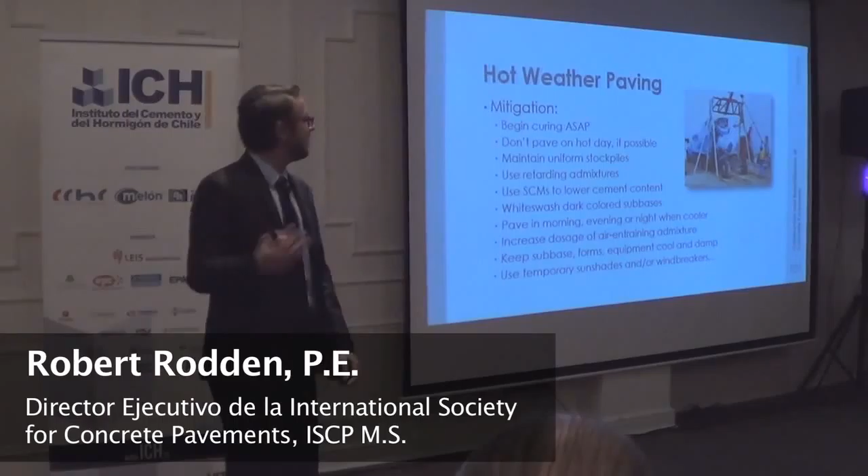We say it very abruptly: don't pave on hot days if possible. If it's too hot and the project can wait, there's more problems than good. Things just become very non-uniform.

Maintain a uniform stockpile, as I mentioned. The loader operator will continuously work the materials, and we'll put sprinklers out on the stockpiles to maintain the surface moisture content.

We can use retarding admixtures to slow down the hydration reaction, so we have more time in transport, more time to place the concrete. It doesn't set up as quickly.

We can use more of these supplementary cementitious materials, like fly ash and slag cement. That lowers the cement content. We end up with the same or better ultimate strength, but we have a slower strength gain up front. So this is useful in hot weather paving.

We whitewash dark colored subbases, such as our asphalt subbases. We pave in the morning if we can, or in the evening or at night, not in the middle of the day, where the sun's heat is adding heat to the system very quickly.

We can increase the dosage of air entraining admixtures if we're having problems keeping air.

We need to make sure we keep the subbase, forms, equipment, and everything else that touches the concrete damp. Even when we're transporting, if we're using those rear end dump trucks, right before they go to the batch plant to pick up the concrete, we'll oftentimes just spray out the inside, not just to wash the surface, but to cool it off some.

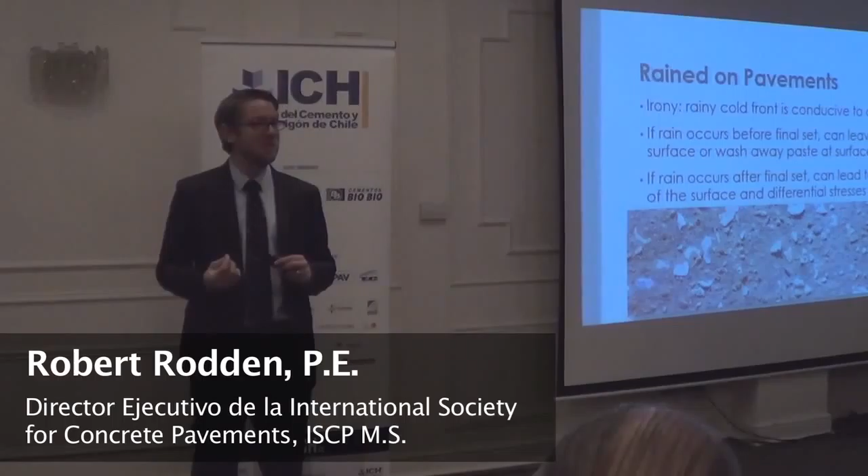Rained-on pavements: some of the irony is that the environment created during a rainstorm, when it becomes relatively cool and very moist, is an incredible curing environment for concrete. Think about the moist cure chambers that we cure specimens in. Right before a rain event is about as close as we get to that without being moist.

But as soon as the rain happens, we have problems like this: erosion of the surface. If the rain occurs before the final set, we can have these sort of imprints and a washing away of the paste.

And if the rain occurs after the final set, we can have rapid cooling of the system, but really right at the surface more than the bottom side of the slab. So the surface wants to contract. If we haven't yet sawed the joints, we have differential stresses develop and a higher risk of cracking.

Here's a bad example, I guess a good example of the bad. Part of the problem is when you have a rooftop or any sort of super elevation to the roadway, all of the water that falls in that tributary area builds up speed as it moves towards the edge.

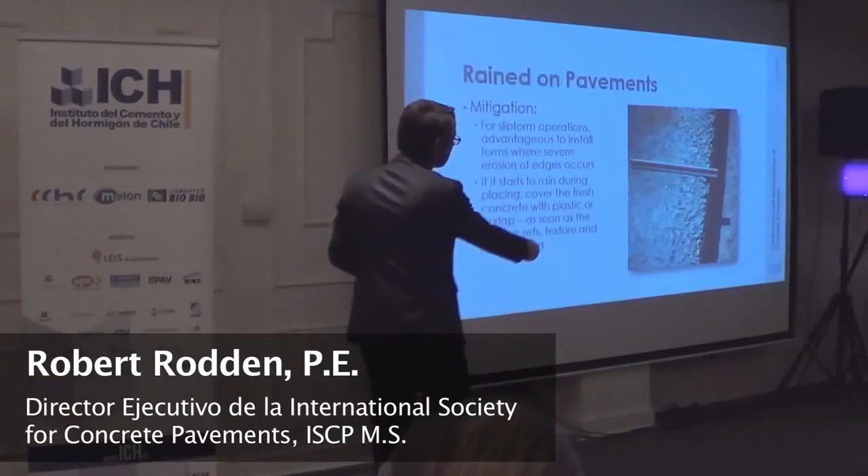And it picks up sand from the concrete, from the mortar. So by the time it gets to that free edge, it's very much like a river that's picked up a lot of dirt, and it has a more erosive force than just water. So it tends to eat away the edges a lot more.

Now if we're slip forming, sometimes we will immediately install an edge form as quickly as possible. So we'll have plywood or some other lightweight formwork readily available to just stick up against the edge of the slab. I believe I have a photo of that and a very bad example soon.

Sometimes we'll have to saw cut this back to get rid of that particularly bad area, if it's bad enough. Now, the problem doesn't extend into the concrete much—it's this near surface issue.

So we like to see that system more diamond ground, or the surface texture somehow removed if it's objectionable. But in many cases, as long as the water to cement ratio isn't appreciably changed at the surface, this is treated as an exposed aggregate surface. And I understand it's not what the owner has purchased—they're not happy with it.

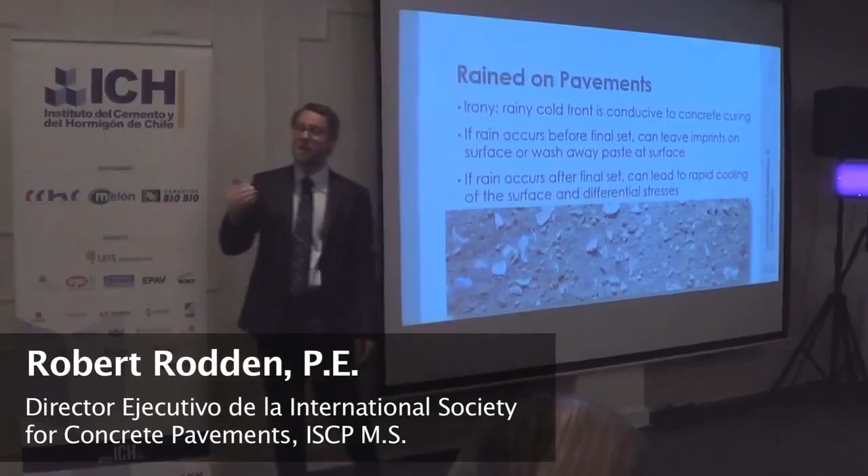So there's sometimes a concession in payment to the contractor, but removal and replacement is a very...

If it starts to rain during paving, most of the texture cure devices and the slip forming operation will have a big roll of plastic. I'll look out for that—I saw that in some of the photos we had for tining. As soon as it starts to rain, they pull that out and cover up the fresh concrete that has not yet set. So the contractor should have some contingencies in place in case this happens. But as soon as the surface texture sets and the cure has applied, they're covering it up with plastic.

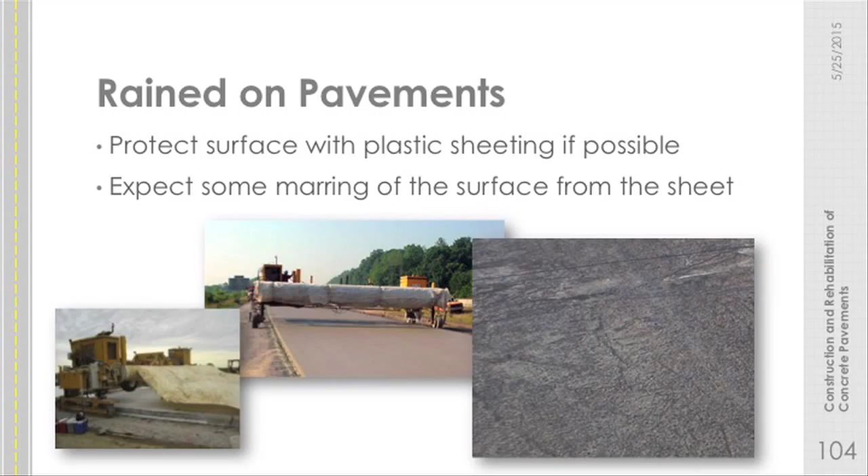Oh, there's a roll of plastic—that's part of the texture curing machine. We have our tines right in the front there. So we protect the surface if possible. We should expect, as this photo on the right shows, some marring or discoloration of the surface if we cover it up with plastic that early in its life. It's just part of the expectations, but if this is discussed in the pre-paving meeting between the contractor and the owner that this is the approach to take, part of that dialogue is understanding the implications of it.

So again, that finished surface with rain changes the water to cement ratio. It gives us a less durable surface, so you could have crazing, scaling, or dusting of the surface. On big enough projects, we'll see cores taken and petrographic analysis done right at the surface. They can't tell you the water to cement ratio of that set concrete, but they can tell you indications of the hardness and other factors that might come into play.

Talked about diamond grinding and the cutback.

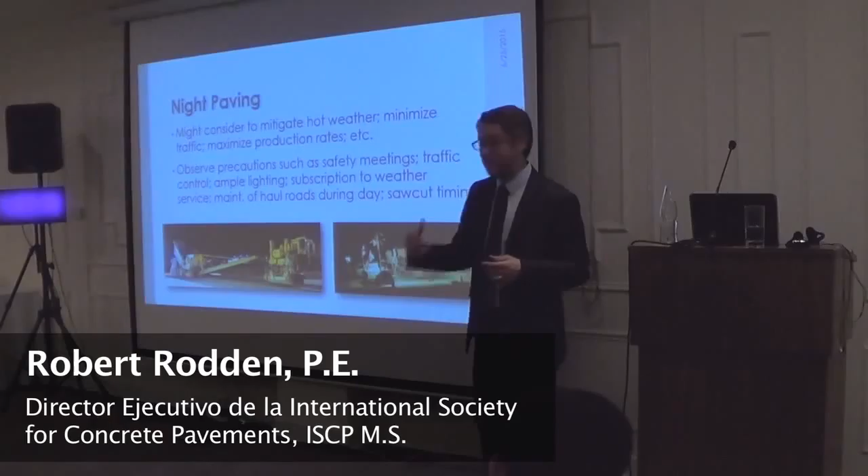Nighttime paving. We might consider this to mitigate hot weather, minimize traffic disruptions, and maximize production rates because we're not dealing with all of the public traffic that happens. We need to observe precautions such as safety meetings—they become especially important to make sure everyone understands the risks at play, discuss traffic control, and ensure we have ample lighting, which has become much less of a concern in recent years since these high output lights are much less costly than they used to be.

Of particular importance is a subscription to a weather service. When we're paving during the day, we can see if a rainstorm is coming. At night, you have no idea what's happening. So from a contractor's perspective, knowing the risk for bad weather, whether on a laptop or a subscription service on radio or something, is useful.

We have to maintain the haul roads during the day because at night they will get beat up—so there's that aspect on the other direction than the usual operation. And saw cut timing becomes somewhat of a challenge sometimes if we're paving at night, just because of the typical duration between placement and saw cutting operations. Our saw cutting operations can be at very strange hours, which sometimes drive up their cost if that's an activity the primary contractor is subletting out to a sawing crew.

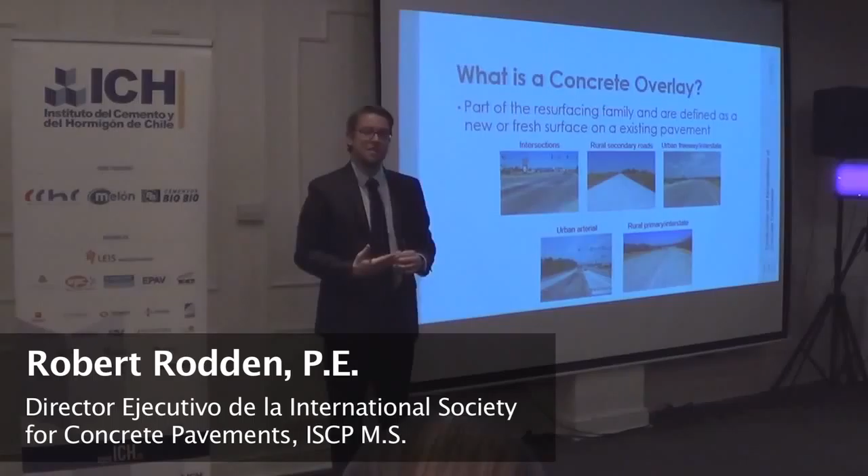Now, when it comes to the sustainability side of things, this is about the most sustainable solution there is. Anytime we extract what's in the field and reconstruct, we're hoping the contractor will recompact the soils to a certain standard, and we're using new raw materials, with more disruption and energy use. If we have what's already out in the field, it's already well compacted from traffic. It serves as a reasonable support system, whether for concrete or asphalt, as long as it's not so far deteriorated that it's a poor support.

So we can go out and on existing concrete or asphalt, place concrete on top of that. We use this for intersections, rural roads, interstates, urban arterials - all over the place.

This is the overlay guide. In the US, we've had 3 iterations of this. The version which I believe everyone here will receive a copy of today was just translated by ICH into Spanish. This is one of those tech transfer opportunities through ISCP that ICH was interested in transferring the knowledge of, so they have stepped up and supported the translation effort. So this was the 3rd edition now, and it's becoming quite thick.

We had the first edition maybe probably 8 years ago now. There were a lot of questions still from engineers after we wrote that initial edition, and we've had these other 2 editions since then. It gets into all the details: the types of overlays, how to evaluate existing sections and select which type of overlay is best for your project, guidance on design, and various miscellaneous design details. Because one of the common comments you always hear when discussing new technologies is, 'well, our case is just a little bit different than what you've explained so far, so it just won't work' - but we've built millions upon millions of square meters of these overlays. We've worked out most of the technical challenges. So there's probably not a challenge you'll face that we haven't somehow addressed.

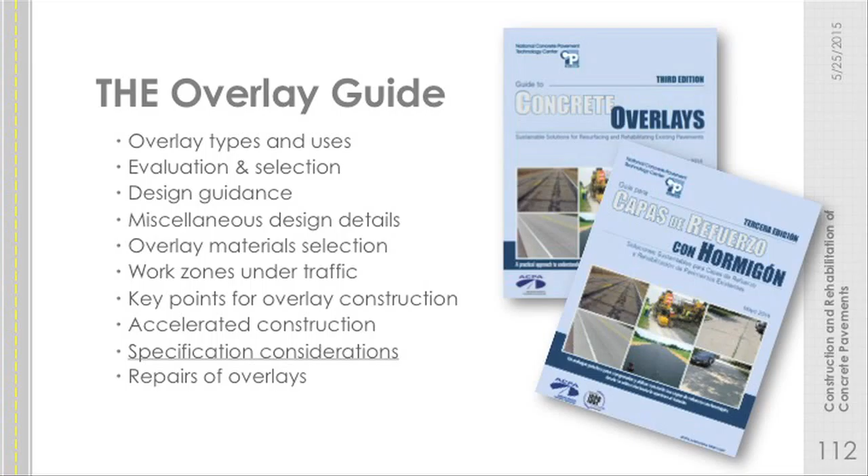Overlay material selection, dealing with work zones, whether it's a 2-lane road with opposing traffic or a 4-lane divided highway, whatever the case is, there's guidance on that. Key points for construction, accelerated construction, even specification considerations. There's some guidance on specification language to help introduce the technology more easily. And then you can't build something without supporting it - on the repair side, there's guidance on repairs for concrete overlays.

The types of concrete overlays - you really have 2 for any given project. A lot of people come out and talk about it saying, well, we have these 6 overlays in this family. You have 2. Your existing pavement is either an asphalt pavement, a concrete pavement, or a composite pavement, which would be asphalt on top of concrete most commonly.

Now, depending on what you have - one of those 3 - you can either bond to that existing system or leave it unbonded. If it's an unbonded system, for the engineers in the audience, we have a neutral axis under flexure right at the middle of that overlay, and the supporting layer bends independent of that. What we see above that is the bonded condition, where the neutral axis, because of the bond between the two layers, shifts down into the depth of the concrete. In fact, some designs have it such that the neutral axis is down inside the supporting asphalt layer, so the concrete is always in compression.

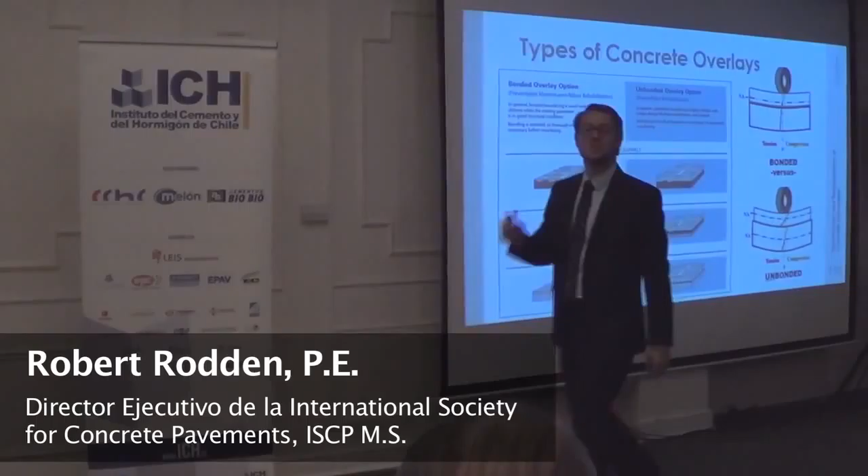Concrete performs very well in compression, performs poorly in tension. Now, by shifting down that neutral axis, we can make that overlay thinner. That's the primary benefit of bonding.

So let's first consider the top here - we have bonded, and we have unbonded. This first example is over an existing asphalt pavement. Now we can see we have our ruts in our existing asphalt, and we're just building right on top of that. If we have concerns about matching grade or changing elevation because of overpasses, guardrails, or other ancillary details, we might mill the surface - we do that a lot for highways. But if we can raise the grade some, we will just build right on top of the rutted asphalt.

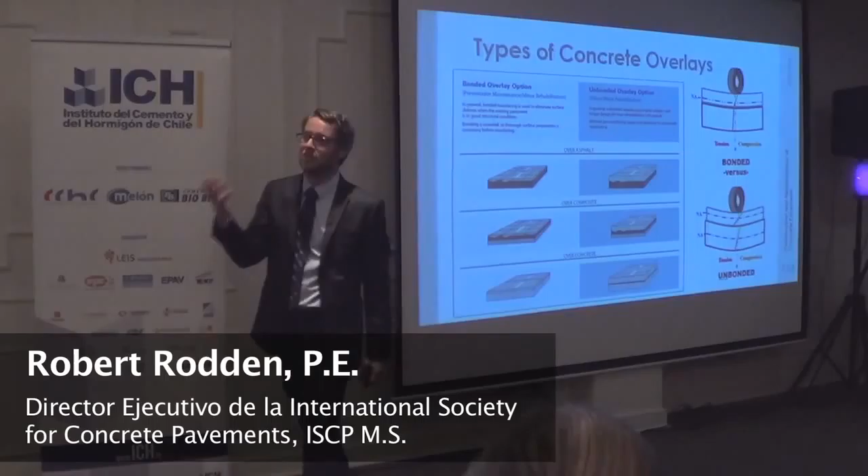The unbonded overlay essentially treats that asphalt as an asphalt-treated subbase in design - it's just part of the support system. Now, if we bond to it and it becomes a composite, we then have to have a shorter joint spacing because of the added friction, the added restraint due to the asphalt layer underneath. So that's why you see the short slabs there.

This is a fundamentally different design approach than the TCPavements' OptiPave, which assumes an unbonded condition. But because of that restraint, we have to have a smaller panel size.

Unbonded over concrete: if we do an unbonded overlay, the new concrete assumes the existing layer is a subbase, essentially like a lean concrete subbase. Now what we see in that particular photo, they have an asphalt interlayer, and they've mismatched the joints from those underneath.

They've done that intentionally so that the weak point in the existing section, the joint, is in the middle of the slab, the strong point in the overlay. So this is just like a conventional concrete pavement on top of concrete.

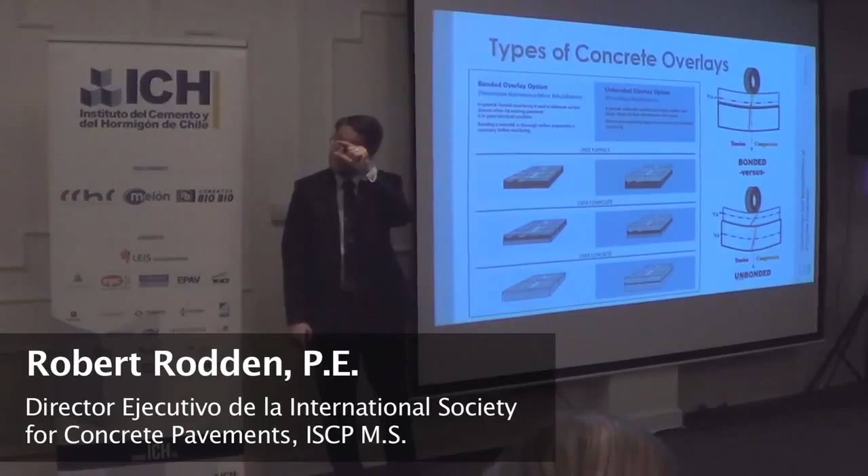If we bond concrete on concrete, we're doing very thin to kind of repair the surface for some reason, and we have to exactly match where all of the joints are. So there's just these little differences and nuances, but all of these technologies have essentially been perfected.

Bonded over a composite is pretty much the same as bonded over asphalt. And unbonded over composite is pretty much the same as unbonded over asphalt. These are increasingly common in the US.

From the 1910s to the 2000s, here's the number of projects that we have. Orange is unbonded and blue is bonded. We're seeing a very big increase in the number of bonded projects. I would imagine in the 2010s, which we're just halfway through, we're easily at over 200 bonded projects. It would be a very large bar.

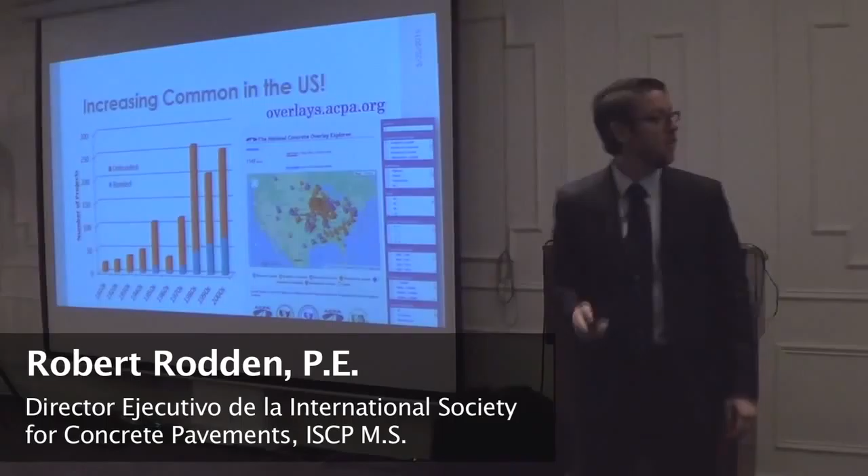ACPA's developed this National Concrete Overlay Explorer, which provides details on design and construction, photographs, and case histories of concrete overlays all around North America. We do have projects in Mexico and Canada in there.

Now, in particular, this bonded on asphalt - this is one that we get a lot of questions on. This is no longer research grade stuff. People think that, well, initially we were targeting 5 or 10 year designs.

I don't know how well the development of the technology has made it to Chile, but our federal government now says you can get 25 or more years of service out of these. We're targeting 25, 30 years, just like a conventional concrete, but we're bonding to an existing aged asphalt pavement, and we're doing it in a very thin section.

So here's some good evidence that this is no longer research grade. This is an interstate in Kansas. They placed about 1.25 million square meters in one project. Very large project, 2 lanes in each direction, divided highway, and shoulders on the outside.

So the design was 15 centimeters by 1.8 meters by 1.8 meters. They did 48 kilometers long. They'd come in and mill out the asphalt down that 15 centimeters so that they wouldn't have to change the guardrails or anything else. They would clean and prepare the surface, install tie bars.

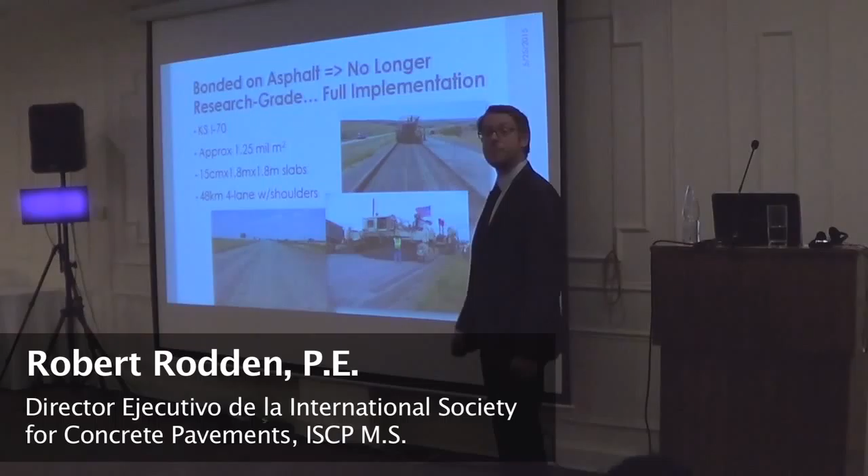We do not use dowel bars at all. The asphalt layer is not erodible, so it should not fault. We place the concrete on top of that. Here they're probing for thickness. They're doing their texturing, curing, all of that.

Here's that photo of the gang-mounted saw. So they're cutting three longitudinal cuts at once. There's the final product before striping and opening to traffic. So we're talking about very large-scale operations here.

I think I have one more slide, and then we're ready for the break. Because we have this new guide, I hope that people will take the opportunity to learn some about the technology. Maybe we'll have an opportunity for a day-long workshop specifically on overlays, which is something that we do a lot, but the environment is changing. We'll come back to this at the tail end of the day as well.

Here's an example of Wright County, Iowa. In this particular case, they bid 125 millimeter thick concrete overlay, which is what was built, versus two asphalt options. One asphalt option: they could do 100 millimeters of asphalt on 75 millimeters of cold in-place recycling.

They had 5 concrete bidders and 2 asphalt bidders. The concrete bid was 13% below the asphalt bid. So the cost, there it is in US dollars. They didn't mill the surface. Their planned overrun was about 10%. They ended up with 11%.

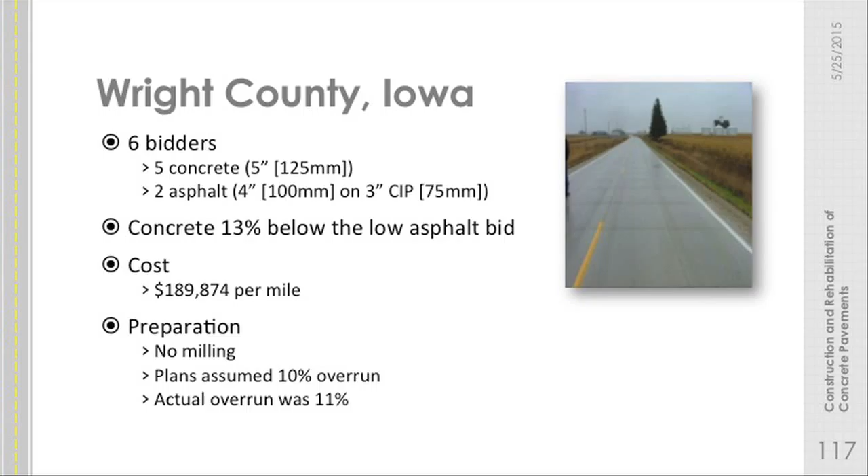There's a lot of counties in Iowa and around the US now that started to do alternate bidding like this to compare concrete and asphalt and to figure out what's the best value for the taxpayers. It's especially a good way to do it as long as you can get comparable designs. But concrete can compete with asphalt now, even just on initial cost in many areas because of what's happened with the prices of concrete versus asphalt in the last decade.

So we're at a good spot for a break. We'll talk about preservation or rehabilitation when we return.